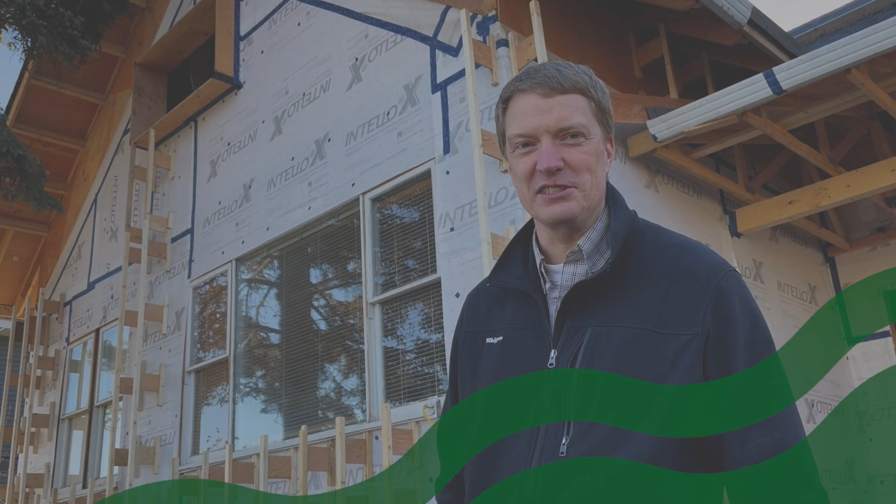My name is Jenna. I'm an initiatives coordinator with the Community Energy Association, and I'll be here guiding you through our first webinar of the Improve Your Home Energy Efficiency Retrofit Journey. So we'll just get started right away. I know everyone's taking some time out of their evening and we have an hour and a half here. So next slide there, please, Murray.

Perfect. All right. So again, my name is Jenna. I'm calling in from what is now known as Nelson, but for thousands of years has been the traditional homeland of the Sinixt Nation, the Syilx Nation, and the Ktunaxa Nation, and is home to the Métis and many diverse Indigenous peoples. As part of CEA's commitment to truth and reconciliation, we recognize the importance of amplifying Indigenous climate leadership.

So I wanted to start off today's session by sharing a bit about Akisqnuk's retrofit journey. Akisqnuk is a Ktunaxa community near Invermere in BC, and their retrofit journey began in 2008 with the introduction of a Ktunaxa Nation energy manager that focused on laying the groundwork for future energy planning and sustainability initiatives, and established a comprehensive understanding of community needs and opportunities in energy efficiency.

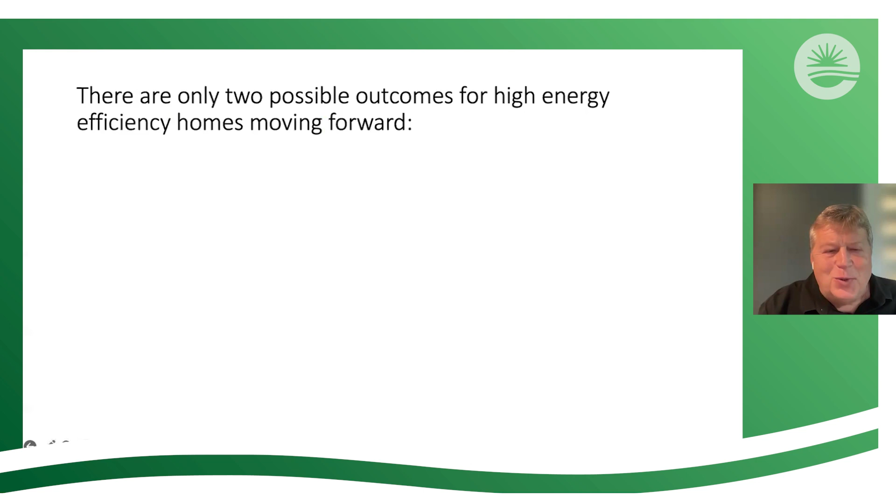What is a motherhood statement? There's only two outcomes: a durable, comfortable, affordable house, or something less than that. It took me a long time to realize that anything short of a durable, comfortable, and affordable home is not the most desirable outcome.

You'll also notice there aren't big scientific names in there. A durable, comfortable, affordable house is anybody's goal. I'm passionate about this industry, but not everybody's passionate about construction. They're passionate about living in a durable, comfortable, and affordable home, and that's where life happens.

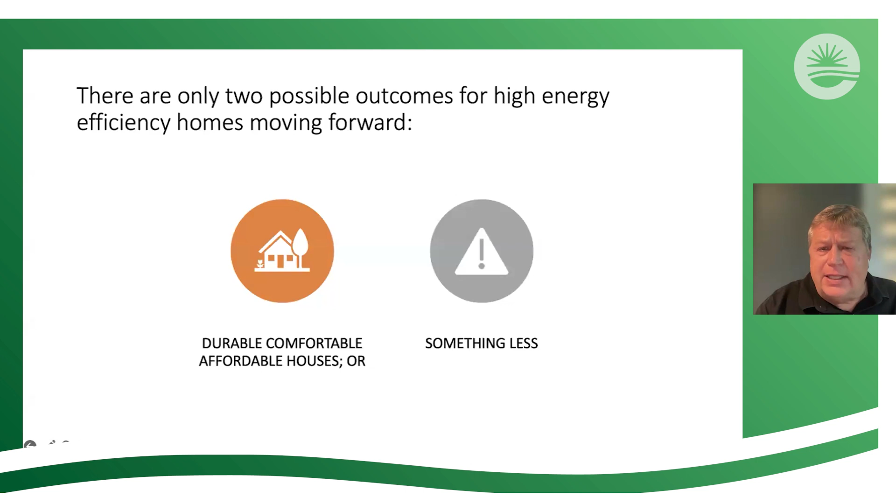So I always want to make sure we come back to that. I'll get into some stuff that seems maybe a bit divergent from that, but I'll bring it back, I promise. So what do we need to do?

The first thing we have to do is gain a deep understanding of the building science of the home, meaning how it was designed, how it was built, how it's performed. That's important because the same home in five locations will perform in five different ways. The unique combination of design, construction, location, and even orientation to the sun, mountains, and other buildings will significantly impact its performance, comfort, and cost in maintaining thermal comfort.

In the beginning, we just put a giant heat source into a house and didn't pay much attention to insulating it. If you wanted comfort, you just put more fuel at it. Because you were putting so much fuel at it, so much energy was leaking out through the barriers trying to hold that living space, and that heat transfer was taking away much of the risk, which almost always comes back to water.

Water is condensation, water is vapor, water is liquid, water is solid - snow and ice. Because we had this virtual hairdryer blowing through our walls, roofs, and even basement walls, moisture didn't really have a good chance to get hold of buildings in the past. I've been asked many times how 200-year-old buildings are still there while 20-year-old buildings are virtually disintegrating. Part of the reason is that in the quest for energy efficiency, we've learned the margin for error is very, very small.

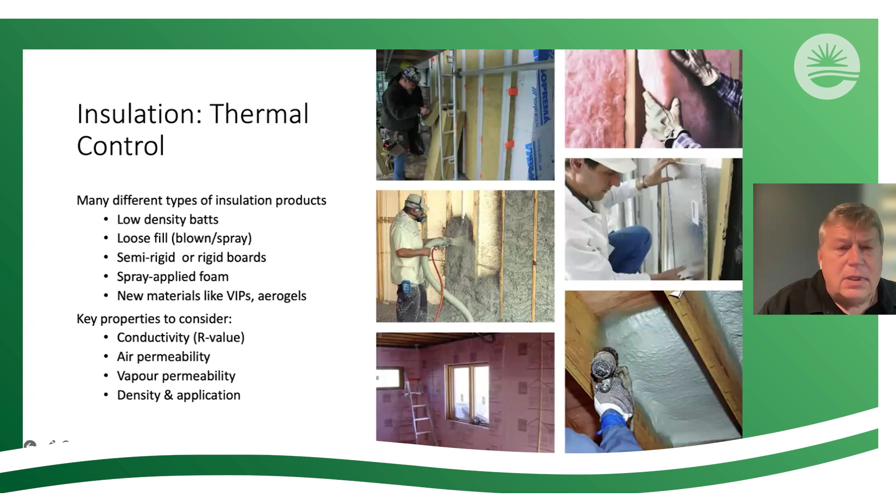So what's the building science elephant in the room? Water.

It's a common thing we can't live without. As humans, we like to live in an environment that has between 30 and 60% relative humidity. That's just human comfort. So too dry is bad, too wet is bad.

A super wet, saturated organic material tends to grab moisture out of the air and absorb it into itself, and it bloats and becomes very digestible by molds and mildews, etc. So water in its liquid state, vapor state, and solid state are all going to have an effect ultimately on the performance of the buildings we create.

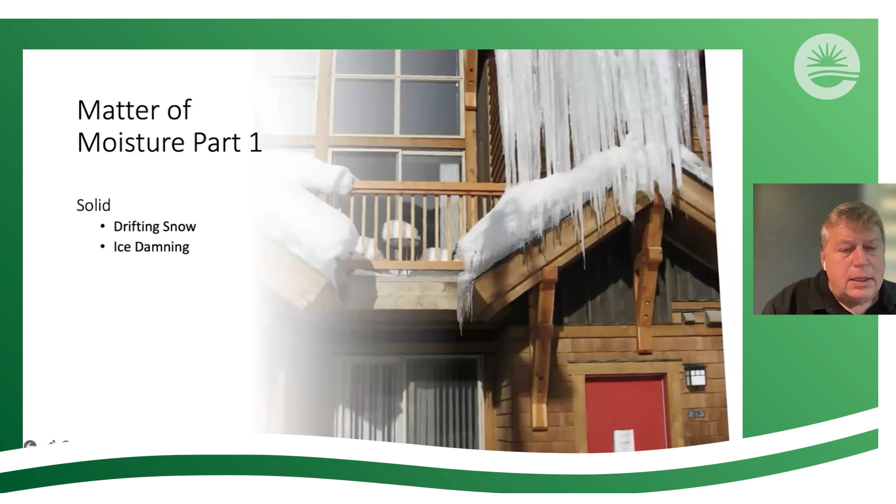The second state of water is in its liquid form.

It can affect us through hydrostatic pressure - that's a big long word for water below the surface of the earth that can affect your basements or crawl spaces where you dig your foundations in. Hydrostatic means it's water, and pressure means it's under force. So water under force below the soil or grade level of your home, acting on the outside of your foundations, can drive moisture into your basements and crawl spaces.

Runoff could be surface runoff around a building, or runoff from your house through redirection of water from roofs into valleys, etc. Rainwater penetration is a really complex conversation - rainwater can get through your defense systems of your building enclosure through many different forces acting on it.

One is capillarity, or wicking of water. Any wicking materials like your concrete foundations will take water out of the dirt and absorb it, and it will climb through that material and appear on the inside surface of your concrete, where it will wet up anything it touches. It can actually then re-evaporate in enclosed spaces and create a nice environment for molds and mildews.

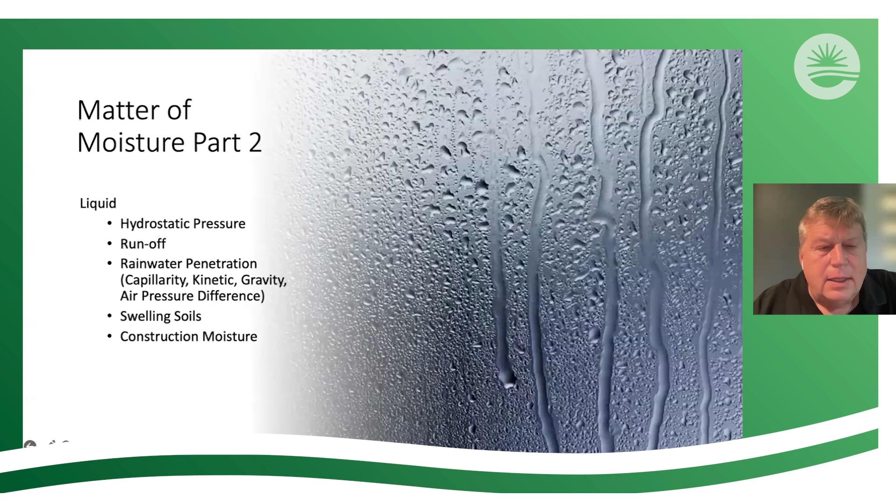Murray and I were just talking about the joys of PowerPoint before it joined just us. A joy. If I gotta manually push them that way, I'm gonna do it.

So rain penetrates if you have a combination of three things. In order to have a leak, you need to have water, you have to have an opening, and you have to have a force or combination of forces acting on the water at the hole.

It's impossible to build a home that's never going to get wet, so trying to get rid of all the water all the time is not really a substantial solution. Even if you were able to build the perfect building envelope with no holes in it, who's to say it would be maintained that way? Who goes out on a regular basis and looks for holes in their building envelope? The one thing that we can control, however, is the force or combination of forces.

And that's where the capillary break came from. That whole rain screen wall that you hear about, the strapping that now goes on the wall and the cladding being pulled off of there, it just separated the hole in the water from the air pressure differential, which was a gap further in. So now it wasn't acting at that hole. We took away that force, and it was enough to relieve us from the leaky condo problem when we went to that level of insulation, about an R20 batt on our 15.6 effective.

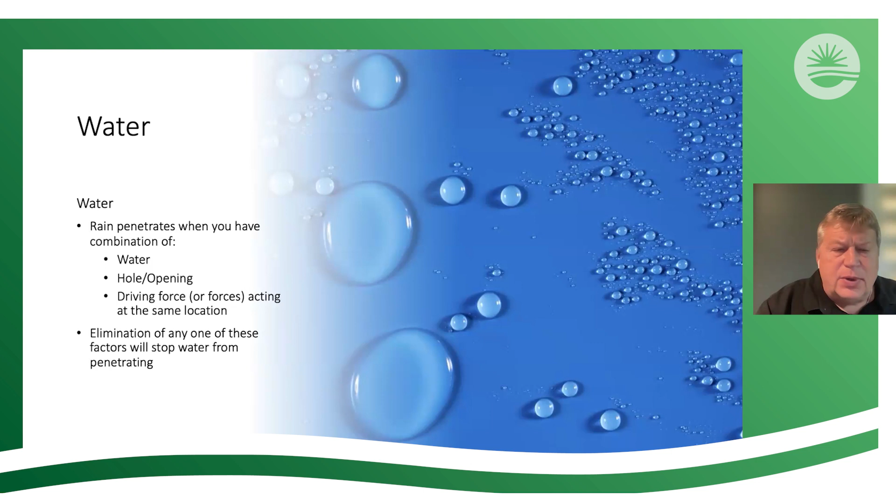Elimination of any one of these factors will stop the water, but it's important to realize that it's eliminating that one force here. Let's do it the old-fashioned way, guys. I don't have patience for technology issues.

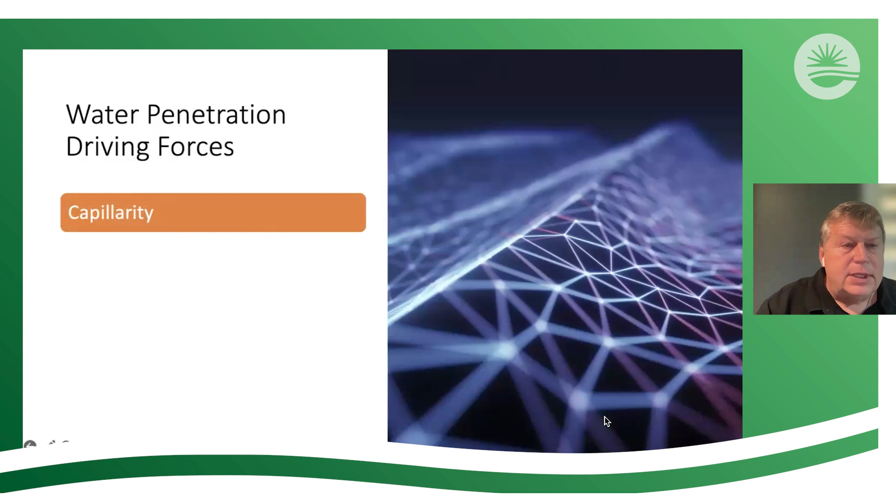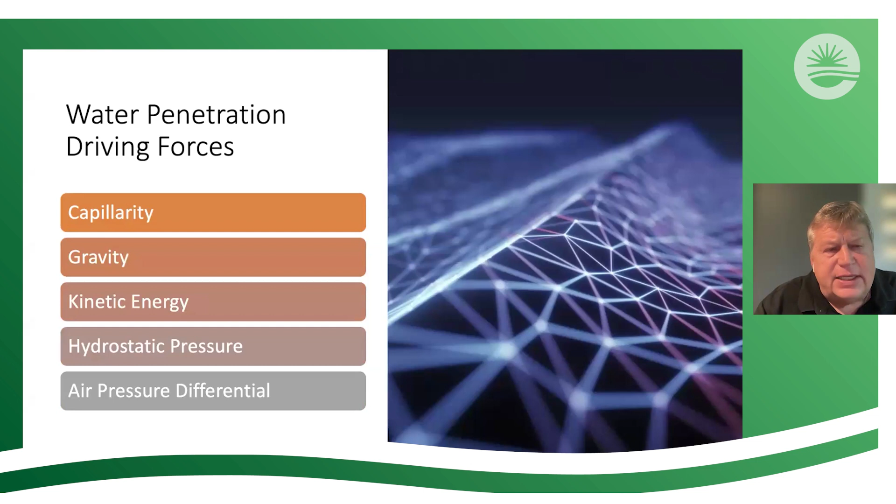Water penetration, driving forces: capillarity, gravity, kinetic energy, hydrostatic pressure, air pressure differentials. Again, we're getting into a too sciencey kind of conversation by the time we get into that part. It's just important to realize that it is sciencey, and we do have the ability to deal with those questions, but that's why it's very important to use the right amount of professional assistance when you're designing and strategizing what it is you want to do.

Then you've got your vapor contributions of water. You can drive vapor across a building envelope in two ways. You can either have a hole and create an air pressure differential, and then a whole bunch of moisture molecules will just flow through that hole. Or you can have diffusion - a much slower, much less significant volume of moisture that will roll through, but it will breathe through like a Gore-Tex jacket. Most construction materials tend to be quite vapor permeable. So what we want to do is have a vapor barrier, and we want to make sure that it's always warm. Otherwise, it becomes a condensing surface. So having vapor diffusion control is important.

Having it in the right place is imperative, and controlling for air leakage is extremely important if we're going to get control of the potential for unintended consequences of building science through vapor, through rainwater penetration in its liquid form, and even snow driving up into attic spaces, etc. There's a bunch of other things that can happen with vapor beyond this conversation as well.

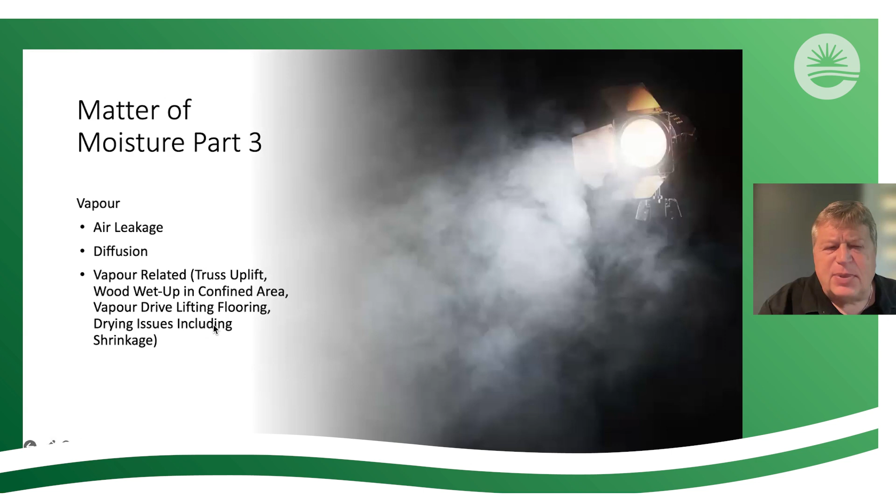But you may have heard of truss uplift, and vapor drive lifting flooring is something I can never leave out of a presentation, and I promise you a picture of that in a couple of slides here.

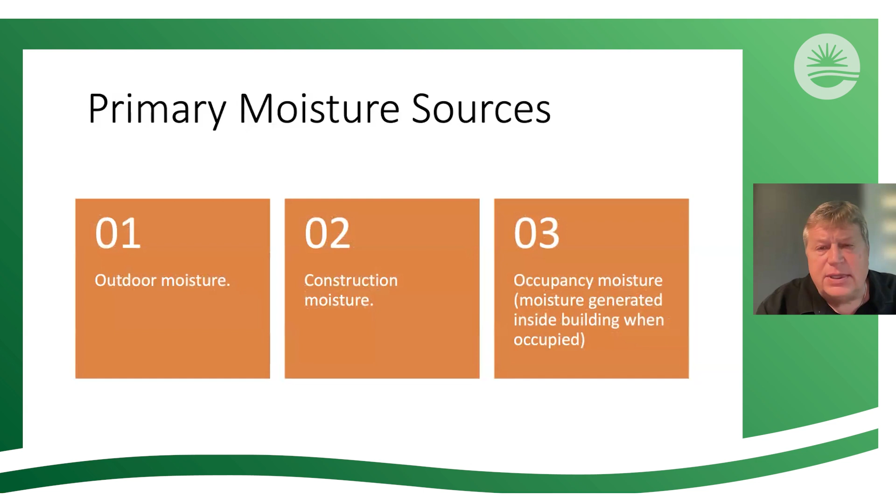Primary moisture sources: outdoor moisture, construction moisture, and occupant loads. People ask me how much moisture is actually from people, and it's more than you might think. What affects outdoor moisture?

Wind can drive it, affecting how much rain gets thrown against the building during wet weather. The highest positive pressures are at the top and edges of a windward face. It's also the negative drop in pressure on the leeward side as wind vortexes over the top of a house or around its side, and that can draw warm moisture-laden air outward through your building envelope, which can be problematic too. So you can get rainwater penetration on one side and vapor condensation problems on the other side of a house. And all of this happens if you don't get vapor diffusion control

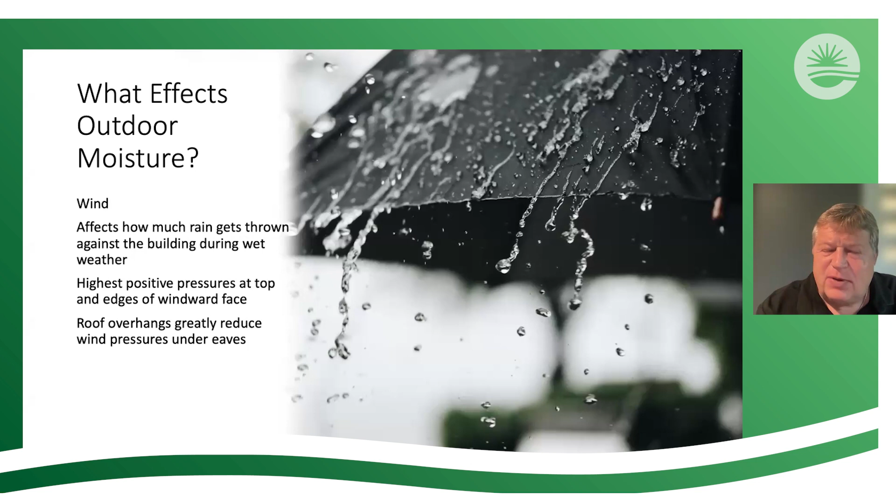exactly where it needs to be and how it needs to be, and most importantly, if you don't achieve air tightness.

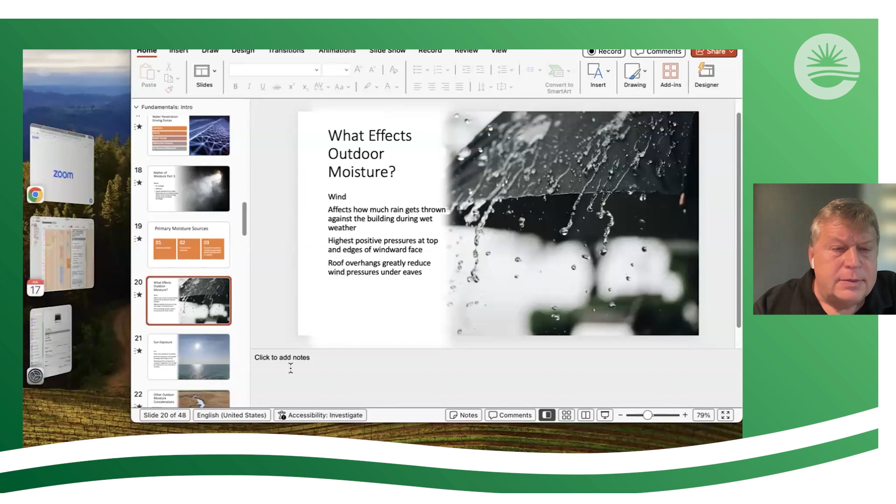Murray, if it's easier, I could share the slides. You can just let me know when to. Yeah, if you've got them there and you want to go through the PDF deck that I had. Yeah, bring them up, then we can switch it over.

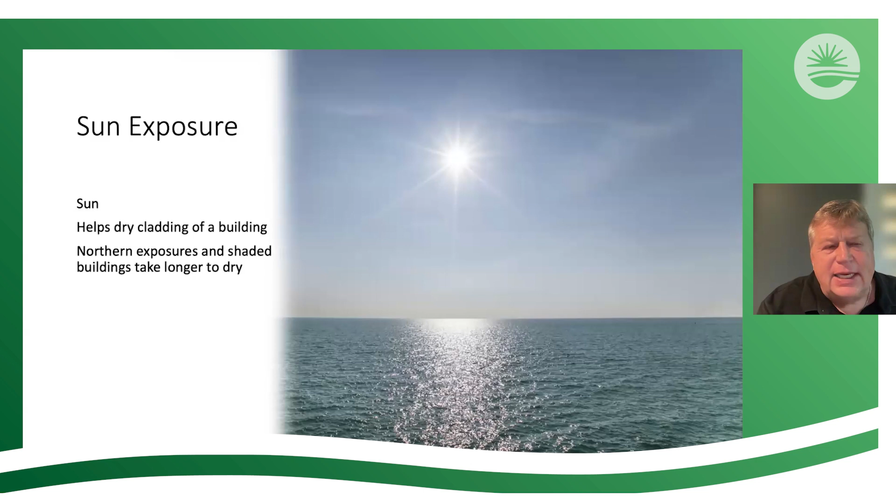I'll just mention that sun actually plays quite a role. It helps in the drying of a building. It definitely affects thermal performance. It's also free heat in the winter if you collect it properly, but it doesn't really help you on your northern exposure. So orientation of a house and where you've got most of your glass and other factors has to

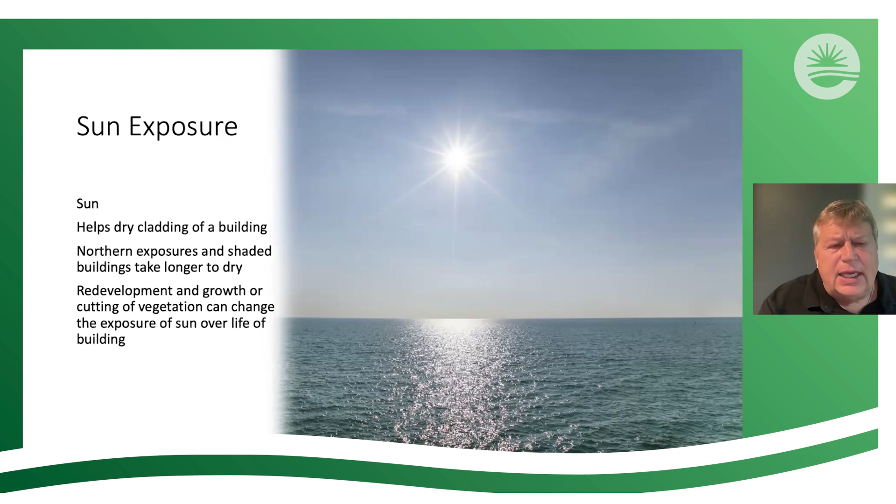be considered. Just let me know when you want to switch it over here too. There we go.

You might also want to consider that if you're designing because you've got shade from a forest beside you, and then they knock the forest down and put similar size houses in beside you in 5 years, the whole environmental load on your building is going to change: wind, sun exposure, etc. So understanding what potential changes you may see, and if you can't control them or you're not sure, hedging your bets is a good idea in design.

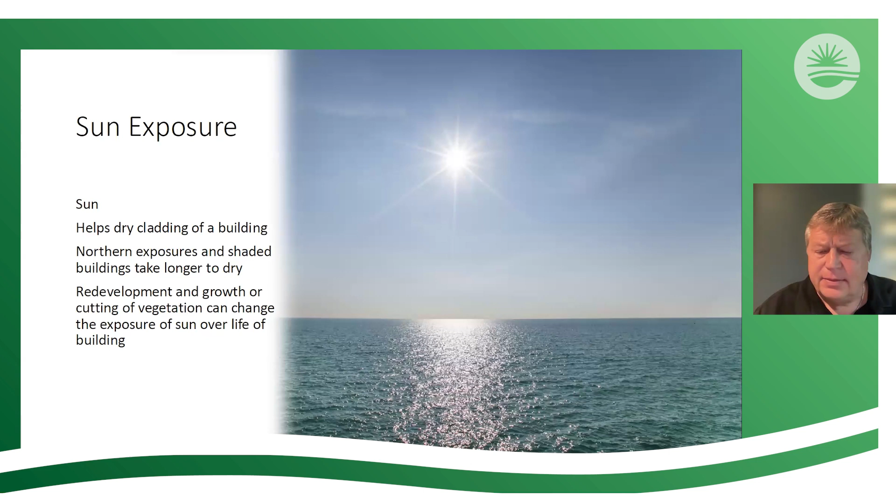Flip that. Outdoor moisture considerations: groundwater, surface runoff, and poor drainage can lead to water entry and high indoor humidity.

Is that a sign of performance and comfort in a home? Or is that a sign that part of your home is really not a very livable condition and we're just tolerating it? We don't need to have that, but we need to understand how we can build a home so that we don't have to suffer those challenges.

A well-drained site will divert runoff and be your friend. Clay soils can have swelling tendencies, as I mentioned before, and that can heave your building around with great consequence. Talk to people north of Vernon and Armstrong—there are dancing buildings up there that are just exciting. Year over year, they can go up and down 2.5 inches from one end to the other. And we solved it by saturating the ground 12 months out of the year. It just kept it wet and it stabilized.

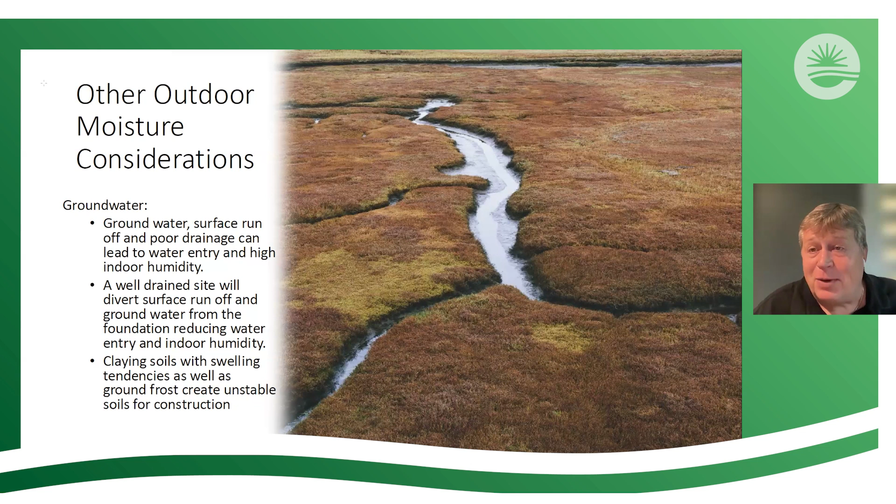Other moisture can come from any direction. So if you want to flip, that's a vinyl—no, actually that's an engineered floor in planks. And you can see how it's all burped up at the wall there.

That is on a basement floor on concrete, and that is a moist concrete slab, and that moisture is driving through, turning to a vapor, and the vapor pressure actually lifts that floor. The owner of that floor, every time they go away for a weekend, had to come down and stomp their floor down—

burp their floor, they called it. So you see it in obvious forms, and then sometimes you see it in the darndest ways in failure out there. But certainly not acceptable.

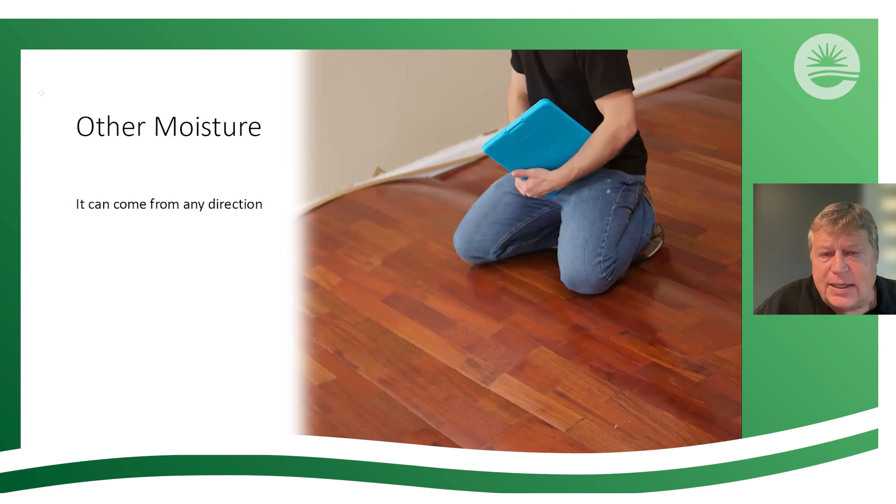So the air barrier—5 requirements of an effective air barrier system. I wanted to focus on this. The next session is going to be on air tightness and achieving it. It's extremely important for so many reasons.

The 5 requirements of having an effective air barrier system: any material you use has to be air impermeable, it has to be continuous, it has to be structurally adequate, it has to be sufficiently rigid or supported to perform as a rigid membrane, and it must be durable—it has to last the life of a building.

And you can't maintain an air barrier typically because it's usually elements within the structure of your walls, basements and roofs. It's not that you buy a bottle of air barrier or a roll of air barrier—you buy a series of materials, devices and equipment that in combination, one to the next, are joined in an air impermeable, continuous, structurally adequate, sufficiently rigid and durable method, so that the entire combination works together as one plane of air tightness in the home.

If you give a balloon to a child and it's got a small hole in it, are they going to be excited? It's sort of a binary thing—you either have a balloon or you got rubber with a hole in it. With an air barrier, it's not quite as tense as that.

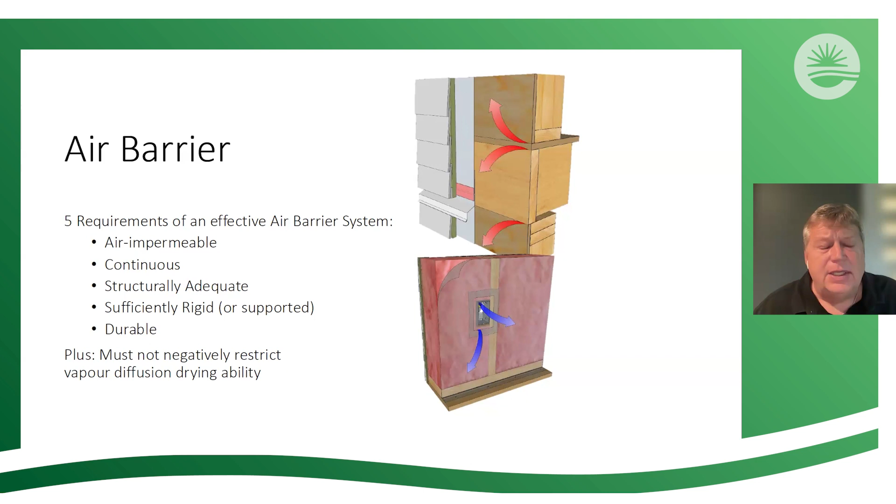There's lots of different materials being used here—insulating materials, sheathing membranes, a lot of components. The newer specifications under the fenestration standards and codes are demanding increasingly higher performance for air tightness, along with thermal characteristics. Different accessories and materials are all being tested and vastly improved. We're even seeing changes in the way houses are being constructed—we're not adding all the beautiful architectural overhangs, portico roofing and nice details that make a house beautiful; we're keeping them in their simplest geometric shape, as you see at the bottom there.

And then it's really easy for us to get one continuous airtight wrap around that entire house. Those are some of the new hybrid materials - a peel and stick vapor permeable membrane that can be applied from top to bottom. The lapping is beautiful and the codes embrace it. It's a very effective way of getting the levels of air tightness we need for advanced energy efficiency, though not the only way. We do a ton with building wraps and synthetic sheathing membranes too, and we've had great success with that, particularly exteriorly insulated.

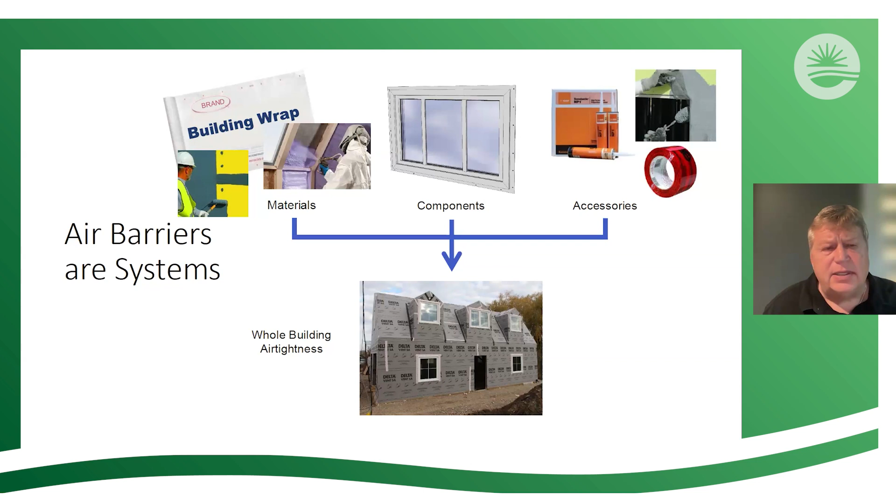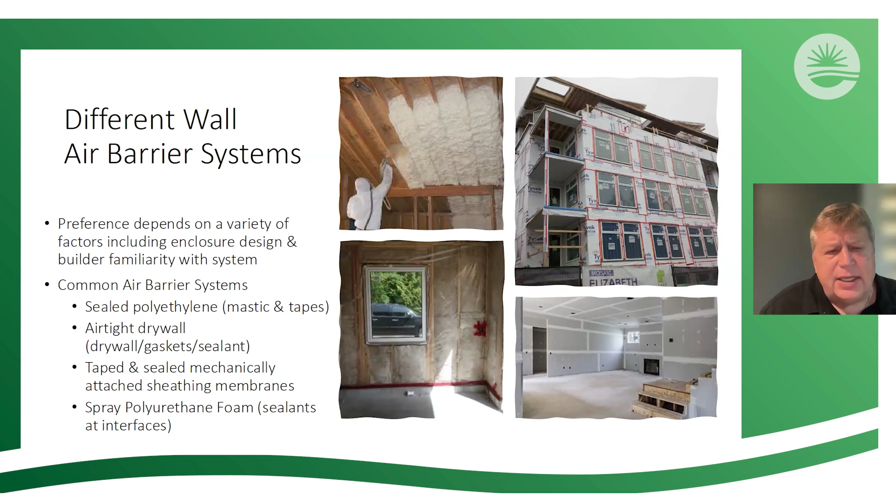So, different wall air barrier systems. You can see spray foam - that's some of the soft foam up there, open cell. You can see the sheathing, synthetic sheathing membranes on the outside. No, they were not the cause of leaky condo - in fact they were quite the opposite. Down below, you see drywall with all the joinery made complete and airtight. Although it looks like a regular drywall job, this is being installed as continuous airtight drywall, which is a technique losing favor. The old school way was poly with a bunch of tape or butyl sealant, trying to get your air tightness along with your vapor barrier with one material against the batt insulation. This is a pretty old school technique that's losing favor for a bunch of different reasons.

So rain penetration driving forces: capillarity, gravity, kinetic energy, hydrostatic pressure, and air pressure differentials. We've talked briefly about all of those. I want to move on and talk about how you design away from that. Well, first thing you want to do is deflect it - overhangs at the edge of your roof, good roofing profiles so the water is channeled to valleys, the valleys channeled to appropriate drains, and the drains channeled to appropriate discharge.

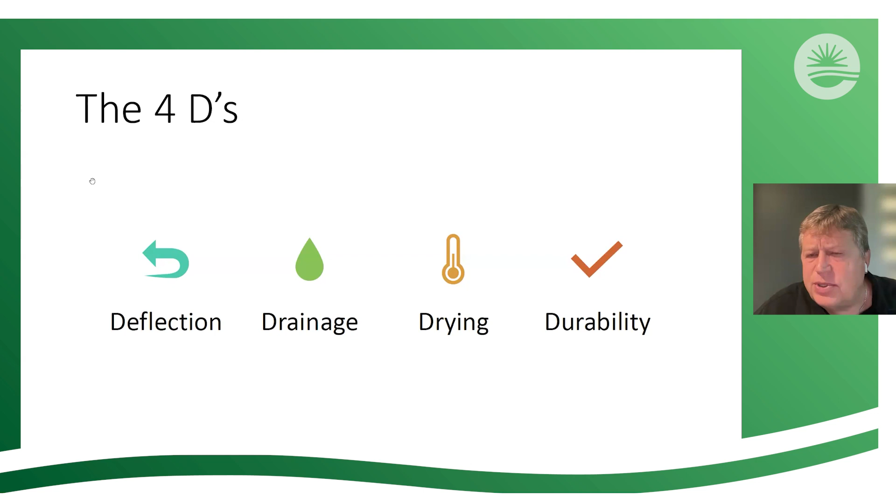Adding drying potential into your construction, so when it's not wet out the house can dry and dry readily. Everything you choose, you need to understand how breathable it needs to be. And then durability - where you know something's going into service in a tough environment, make sure we're choosing materials that have durability for those tough environments. So: deflection, drainage, drying, and durable materials.

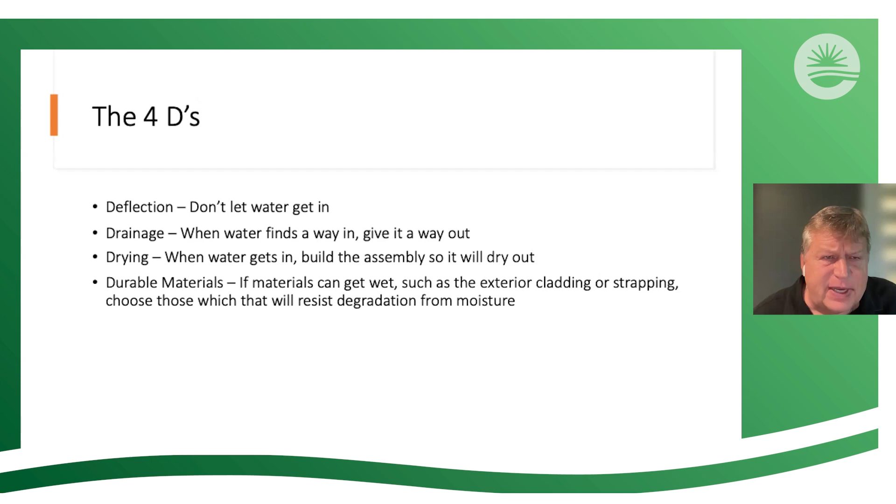Construction moisture - there was a lot of concern about pre-existing construction moisture. It's still a concern, and obviously on the wet coast, maybe not as much in the east and central Kootenays, but it's not uncommon to see 6 months of rainfall on a home before it ever gets dried in. That can put an awful lot of pressure on things. Materials are supposed to be at 19% moisture content or less before you close them in, in terms of your main structure. A lot of times when we go in and check the plates and things that have been soaking for 6 months, they're in the 24, 25, 28% range.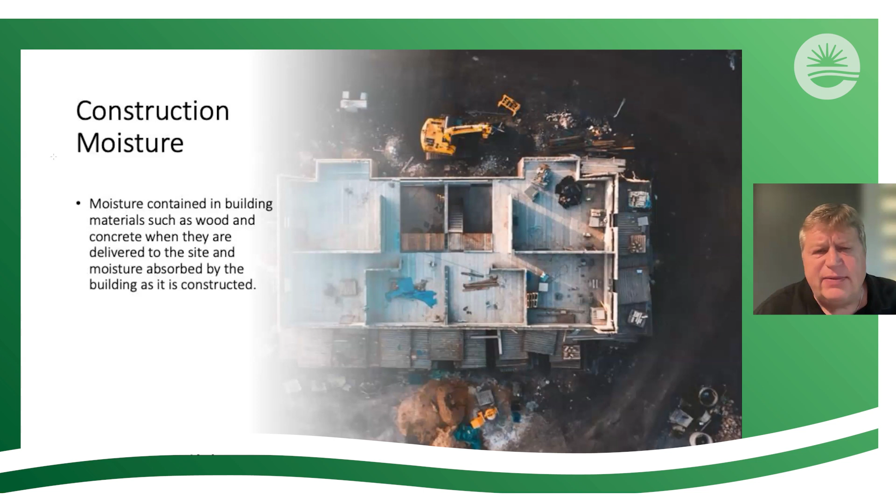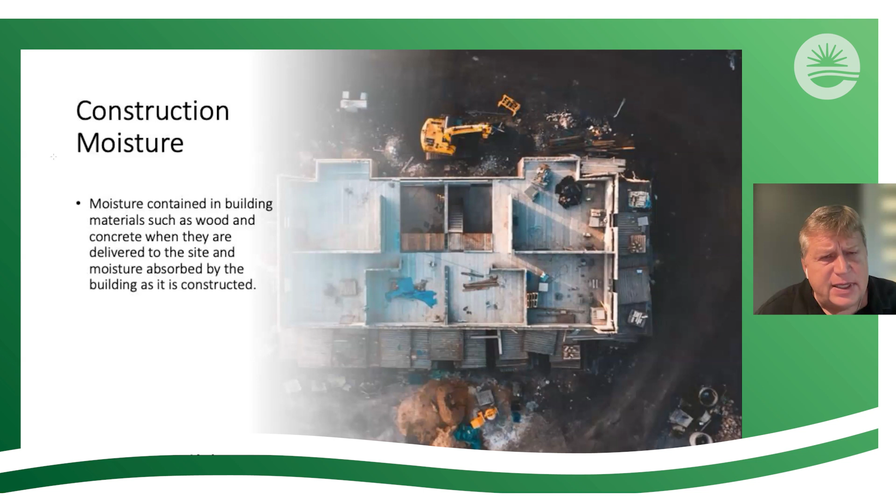So improving the speed in construction brings economic value and lowers the environmental loads imparted on a building during construction. Reduce construction moisture by ensuring you're under 19%, keeping materials protected when storing them, and testing your lumber before you close it in. These are all tools that are readily available and well understood, but they have to be practiced - constantly sticking with moisture meters and understanding what the readings mean.

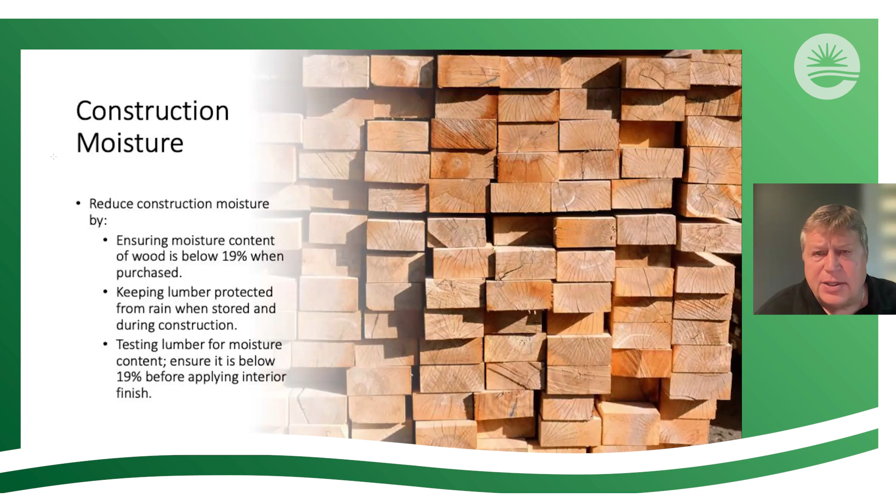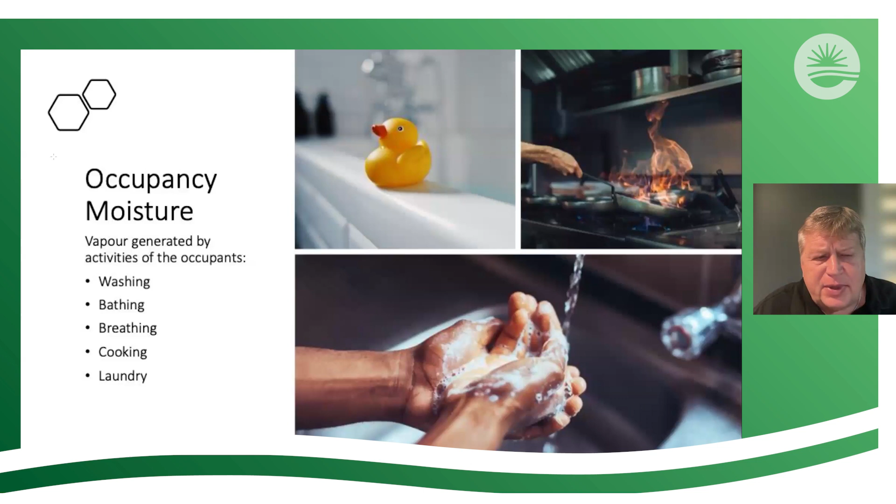I want to talk about occupancy moisture and humidity - how much should people add to the environment? Human activity comes from washing, bathing, breathing, cooking, and laundry. In new construction, moisture in concrete and lumber can add as much as 4 to 5 liters a day during the first heating season, so there's a substantial drying period in that first year. An additional 2 to 3 liters a day come from a combination of clothes and floor washing, use of gas appliances, cooking meals, dishwashing, house plants, showers and baths - that's 5 to 7 pounds of water. 4 occupants generate about 5 liters of moisture per day.

5 liters of moisture a day in the form of vapor. So if you didn't change that air inside your house, and it couldn't breathe out through the building envelope, and we put a vapor barrier in there so it can't, and it can't exchange because you've got a really good air barrier, then what would happen to your home if you just let people live in them? The truth is you would blow past that 60% relative humidity quite quickly.

So the idea of building a building envelope super tight is not because you want to entrap everything in there. You still need to vent it. And we've built buildings tight enough since the 80s that we can't just rely on accidental ventilation through the holes in the building envelope.

So what we need is mechanical devices that allow us to exchange the air with that good, lower absolute moisture content air from outside and bring it in. Heat recovery devices and energy recovery devices pass it through a heat exchanger, so you get the fresh air coming in, but without mixing—it goes past in the heat exchanger through a bunch of chambers where the exhaust air passes. So all of the heat in the winter that goes out preheats the air coming in.

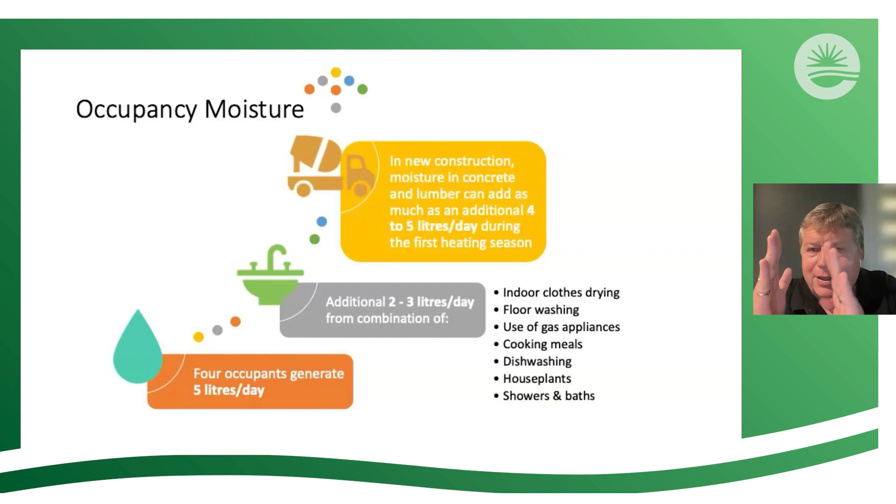So in the winter, somewhere through that insulation it goes from, on a cold day, -20 to +20. Somewhere in there is a magic point where this no longer just diffuses as a vapor, but actually condenses on surfaces - so that's wetting inside the wall.

So to answer the specific question: you have to build it airtight if you want energy efficiency, and you have to build it vapor tight, but you have to get the vapor tight component of that assembly on the warm side. What we're finding is great success if you build your structure out of 2x4s.

You don't need 2x6s for structure unless you're building a crazy 3-story plus home, and then the building code will push you to 2x6s on the bottom floor. But we're building most of our high energy efficiency homes back down at 2x4s, leaving them empty, putting the sheathing on the outside of the house. Then we're putting the vapor barrier on next as a waterproof membrane, and now it's perfectly airtight, perfectly vapor tight, one material. Then we put all the insulation on the outside of that.

There's a great building scientist out there who asked me 38 years ago at a presentation I did at BCBEC, when he was still a student, and is now the great Joe Lstiburek, the PhD guy from Building Science Corp out of Boston, and expat from University of Waterloo in Ontario. He's a great presenter and a tremendous guy to listen to. But he asked me when I presented the perfect wall concept.

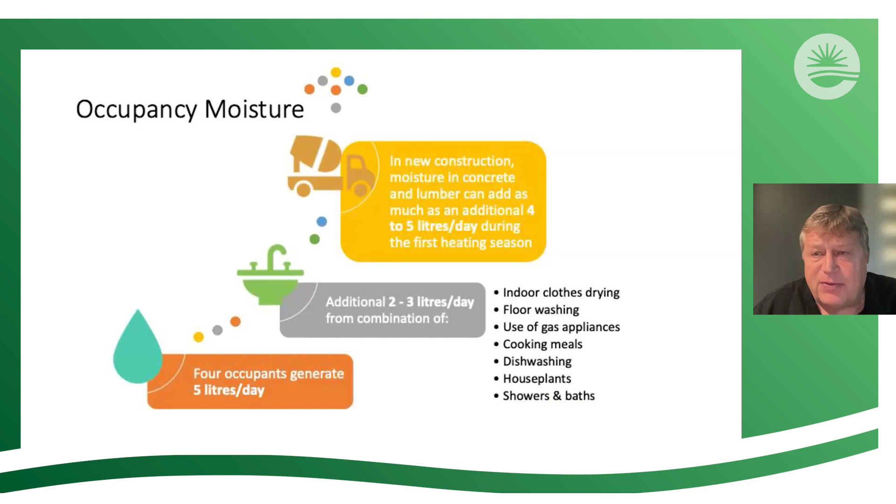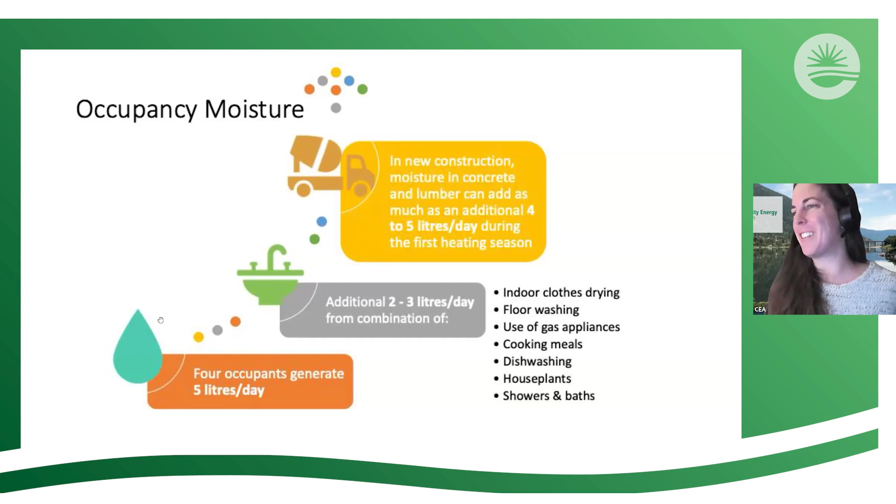Well, we'll move forward to some health and safety concerns, and I might bring up spray foam again in our Q&A there. No, absolutely. Okay, alright, so I'll carry you along. Thanks everyone for the questions, that was great. I'll just forward us along to the next slide there.

So human comfort is defined at 30 to 60% relative humidity. I touched on that quickly, but I think it's really important. To be honest with you, it's 27 to 55% by ASHRAE, the American Society of Heating, Refrigerating and Air-Conditioning Engineers. But what we found is, particularly in the wet lower mainland, that it's warm enough and wet enough for a long enough period of time in the shoulder seasons, fall and spring, that if we run continuous ventilation, the air outside is ultimately too wet—if we bring it in, it won't stay below 55% relative humidity, it'll actually saturate you above 55%.

So the answer to that, two code cycles ago, was the government decided to just round it off. If you round off 27, it becomes 30, and 55 you can either take it up or down, so they took it up. What it means is you don't need to bring in a mechanical engineer for every home you build in the temperate rainforest of the wet coast. In the Kootenays, you're not worried about that—the air 12 months of the year has value for lowering the humidity inside. So we vent for control of humidity in the houses, and it's based on the expected occupancy of the home, expecting it will be used in a way consistent with how the average Canadian uses their home.

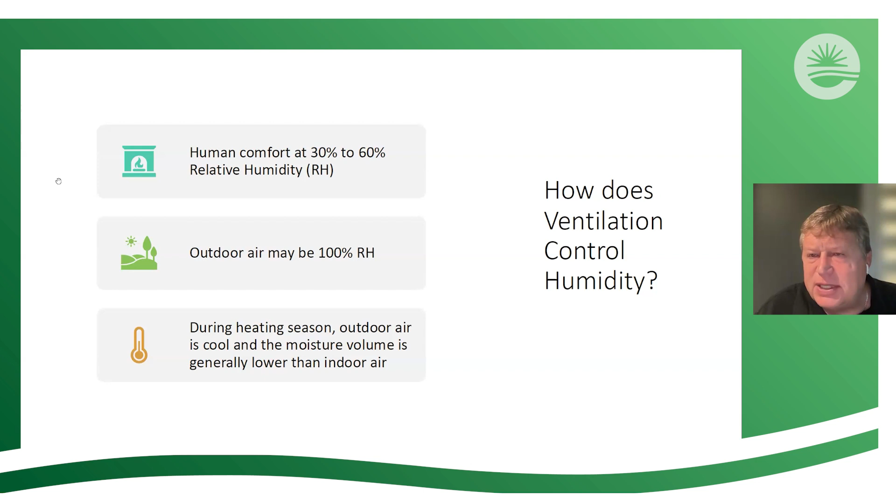So for a modern home to perform, we need a moisture barrier, which is your cladding or your roofing or however you're protecting the outside of your foundation wall. You need a vapor barrier. You can't not have it. And without it, you would have a tremendous amount of challenge.

Interestingly, regarding ICF, that polystyrene foam at 2 to 2.5 inches is a vapor barrier. Anything more than 2 inches of concrete fill, and those ICF are typically 4, 6, and 8 inch fill, is a vapor barrier, and so is the foam on the outside. So where's the vapor barrier? Well, the whole wall is vapor tight. So you really don't care which way the vapor is pushing. It's never going to go through the wall, and it's never going to cause condensation because there's no pockets in there for condensation to form, no condensing surfaces.

Whereas when you have lightweight frame construction, it always finds pockets and condensing surfaces. You need a capillary break in high moisture index zones, and there's an awful lot of discussion that's quite advanced, and it would not surprise me at all. I'm almost to the point of saying it's highly, highly likely that by 2030, any house built in Canada will be required to have a capillary break behind the cladding.

So no more exemption for the lower moisture index regions across Canada. And that isn't because it's suddenly getting wetter in other locations, although you'd be surprised if you look at the wetting maps in Canada. It's like a big U that comes from the west coast and goes up under Calgary and goes out and swallows up Saskatoon, misses Regina, and is now almost over to Winnipeg, and then it comes back and, of course, widens out and gathers up the whole east coast. All the way in there by the new wetting data is in a high moisture index region.

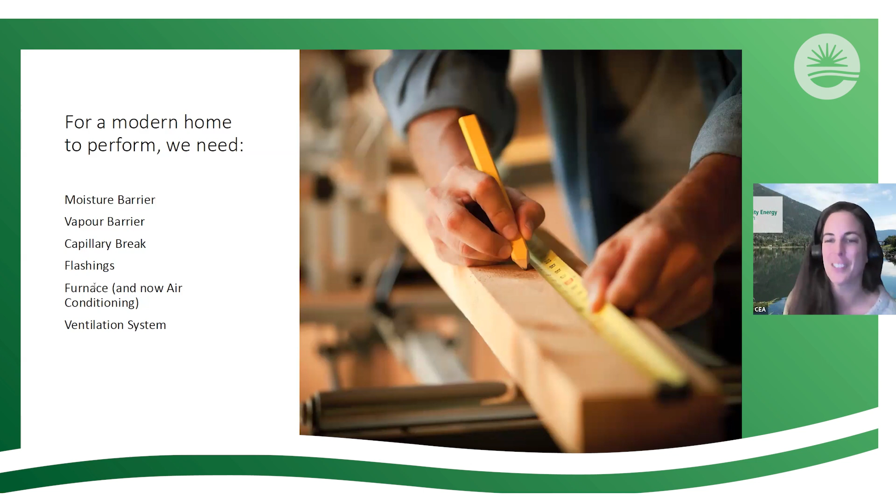Murray, I just want to give you a time check there. We have just over 10 minutes left in the session, and I know we want to. Yeah, and I think we can blast these ones real fast. Let's hit it.

So energy efficiency, what does it take to improve energy performance? Reduce the energy leaking out or sneaking in. That's all you got to do. The building envelope, or building enclosure, is in its simplest form a sphere that keeps the outside out and the inside in. You wouldn't need any energy if zero was flowing in or out, because you'd set a temperature in there and it would just stay that way forever.

Energy is interesting. First law of thermodynamics: you can't create or destroy energy, you can only change its state or location. So if you had thermal comfort and no way for it to escape or come in from outside, you'd have a perfect building envelope that would need nothing. But you'd have an opposite problem, because if you occupied it, your basal temperature of occupancy, your human-generated heat, would cook you out.

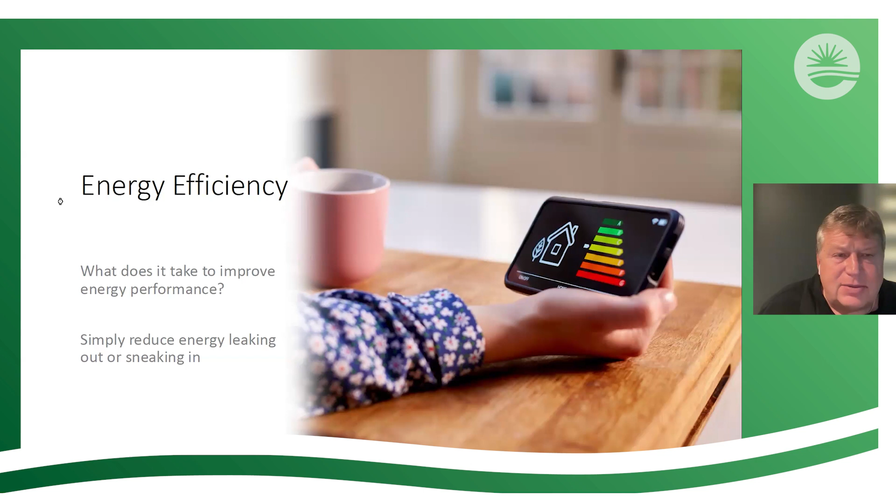But that's all energy efficiency is. Energy moves in 3 ways. Tough to figure it out.

The first way it can move is conductively. The best way to understand this is to imagine if you were holding onto that copper pipe while soldering this joint without a glove on. What would happen in a very short period of time? You're not hitting it with a heat source, but it's going to get to you by conducting through a conductive material. That is one way heat energy moves.

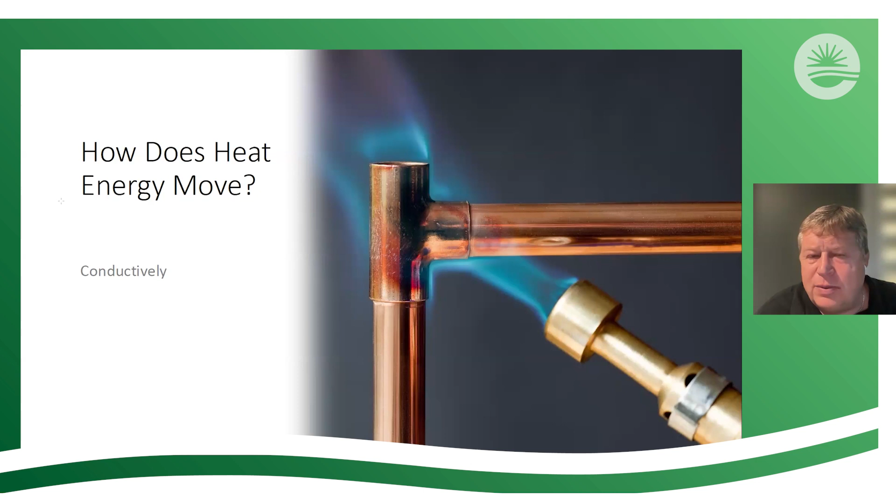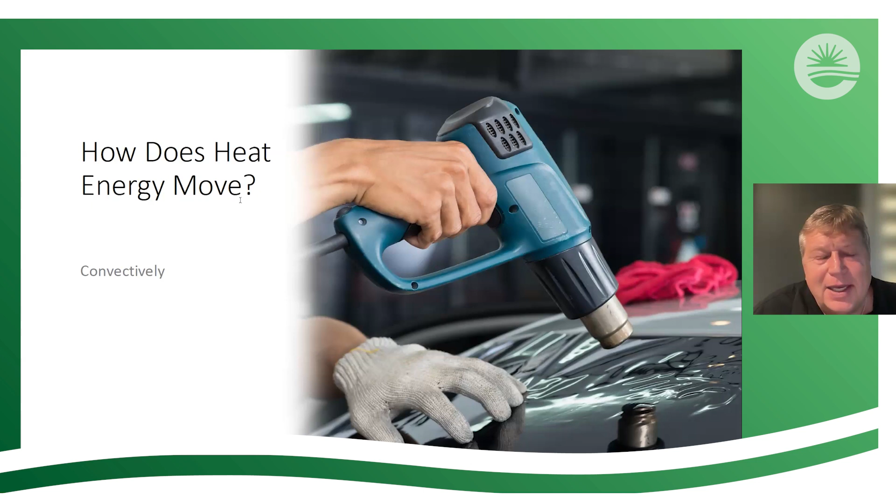There's a second way it moves. Here's a heat gun—it's got a coil, and through resistance it heats up. Then it's got a fan, and it takes air and blows it across the coil, which transfers the heat into that air. Then that fan convects that hot air to where we want to do work—in this case, putting a wrap on a vehicle. That's convection. So what is a forced air furnace—is it a conductor or a convector? It's a convector. There's a third way heat energy works, and it's a bugger to explain.

It's radiant energy movement. What I'm going to do is prove to you that it's there. There is Sol, our sun, and there's a PV panel. We know that whenever it's shining, we can take that energy and convert it into electrical energy. We also know it gets really hot when that sun is beating down on us. But what's between us and the sun there? Is there any conductive material, any brass pipes, or even air particles out there? There's nothing. So what could it conduct through?

It can't. Is there a giant fan behind there and pixies throwing dust in front of the fan that warms up as it blows over the sun and bombards us here at Earth? No. There's a little bit of solar dust out there, and in the 8,000 years it would take to drift from the sun to us, it would have lost any energy charge to other solar dust or dissipated it. So I'm not going to prove or explain radiant energy transfer other than to say, if it can't conduct or convect, what's left?

The science to it is, it's just light energy. It's in the infrared spectrum where we don't see it, and it moves exactly like light, but it actually is heat. That's why infrared cameras can see thermal emissions—they can see body heat coming off. You know, the criminal sitting behind a bush trembling, thinking he's so well hidden from a thermal camera—no, the camera sees him because it's picking up that infrared light, which is that heat energy.

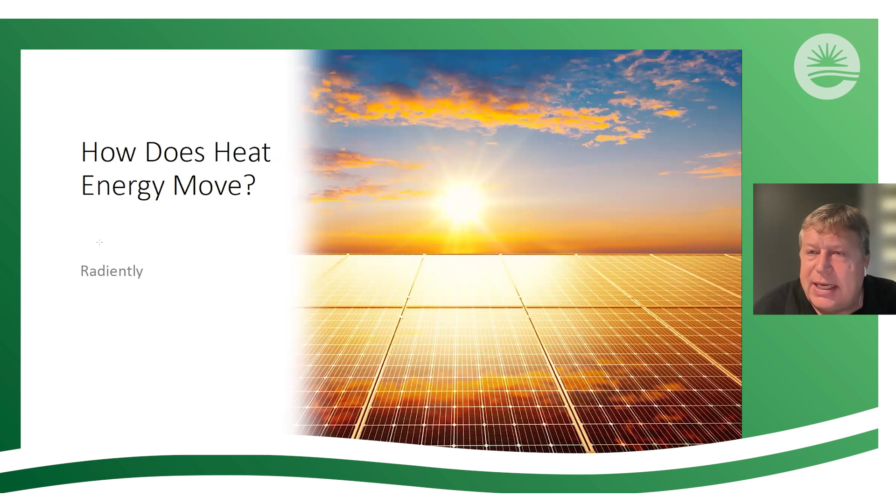So there are three ways that energy moves. If we want to take care of conduction, we've got to improve the insulation and have better quality windows and doors with good U values. U value is the inverse of an R value. The R value of windows and doors isn't very spectacular, and they don't want to advertise this phenomenal R5 window when it's expensive compared to the R20 batt insulation we're putting into our walls. So they use the inverse, talk about conductance, and get a U value—it is a real measure, but it just doesn't confuse people by comparing it to batt insulation.

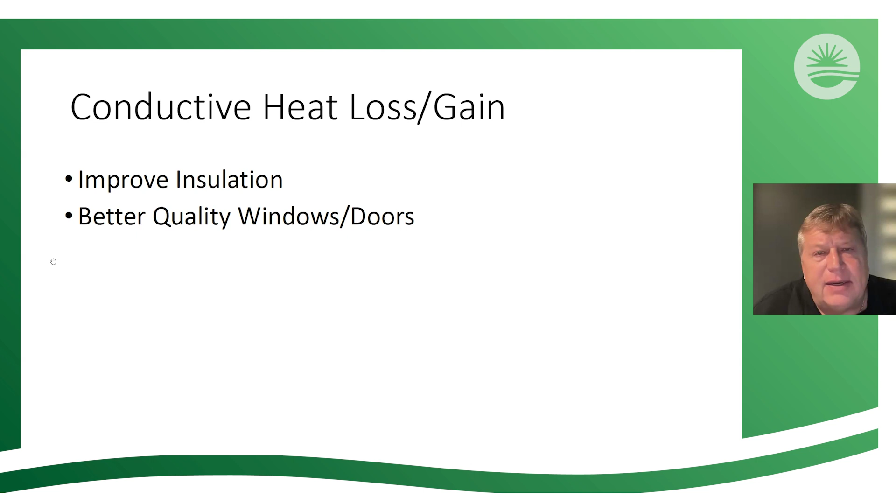You just got to buy better windows with low U values—the lower the better for that conductive energy gain or loss. Next, if you want to get rid of convection, you just need air tightness.

That's it. Everything's got to be airtight as one complete air barrier system around the entire perimeter of your home. That's all you got to achieve. It also takes care of flanking paths for acoustic, and it gives you control of your ventilation system, so you can put heat recovery into it, you can put filtration into it. There are so many things that air tightness brings that it is just a given.

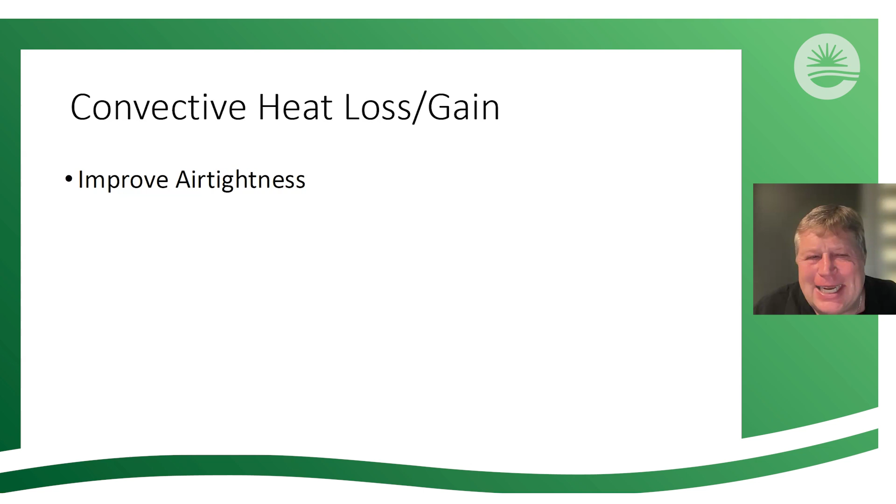And your next session, is James doing that one, Jenna? Yeah, you're going to get yourself a good old dose of him, he's an old student of mine from BCIT, and he's an amazing soul. He's very passionate, and he will definitely show you that air tightness is not an option. And we'll hit the next one here.

For radiant heat loss and gain, realistically, if you had no fenestration or glass surfaces, no transparent surfaces on your building, you really wouldn't care too much about radiant heat loss or gain. A little bit of surface effect, you can take care of that with some tinfoil on the outside and you'd be fine. But we get an awful lot of solar heat gain through our windows when the sun is shining on them, and we also get radiant loss from inside going outward through our windows.

That's where these low-E, or low emissivity, coatings come in. So when you hear low-E glazing, there are different films. Some are designed to keep the heat in from going out at night, and some are tuned to keep the high temperature heat source of the sun from pushing in.

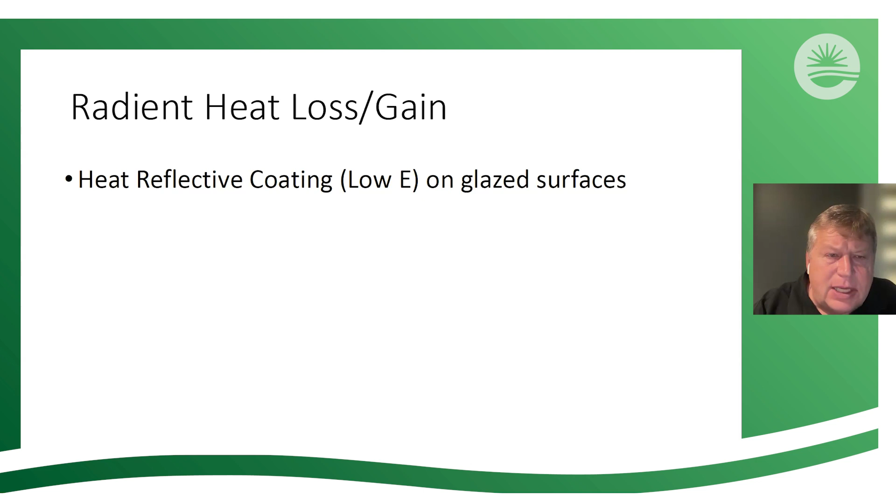So we're at the end of the poll here. Is there any way I can just get one more minute here? Yeah, you go ahead. Sorry, I was just running the poll in case anyone has to jump off right at 7:30. Do you want to just flick to the next one here? Yeah, if you could move that poll over too, because I can't see mitigating. I think that's on, that might be on your screen there, Murray. No, is it okay? Oh, so you sent it to me. Oh, it was amazing.

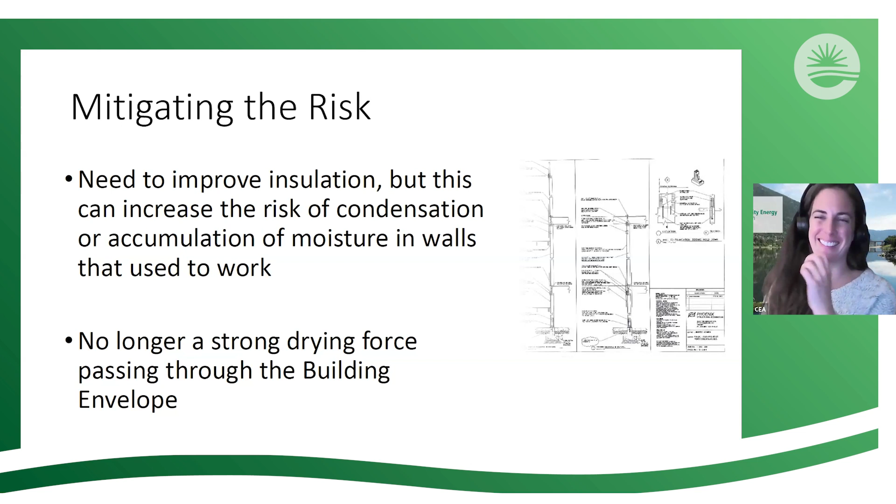Mitigating the risk: need to improve insulation. I did see a comment in there too, an opinion when we were talking about radiant, so I do want to give a minute to read what that was. Need to improve insulation, but this can increase the risk of condensation or accumulation of moisture in the wall, no longer a strong drying force passing through the building envelope. We talked about that, let's flick to the next.

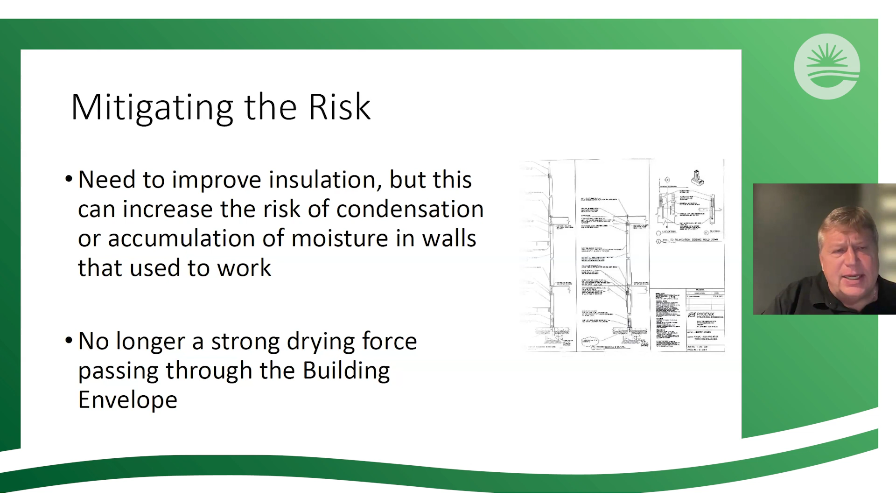It is the low-hanging fruit. You can't create a problem for yourself by going airtight, and you can't go backwards to the time when we didn't need air tightness. Those days have been gone for 40, 50 years almost here in Canada. We've coded ourselves to a higher expectation than that. So understand that there's no longer a strong drying force passing through the building envelope by not allowing warm air through there in great volumes. So we've got to mitigate that risk. We've got to make sure that if you're going airtight, you want to go all the way. Remember the child and his balloon, or her balloon. Next slide.

Mitigating the risk: need to improve heat reflectance in your windows, but that can decrease free heat in the winter. On the right there is a TECA, and that is a F280 report, CSA F280 report.

This is one of the tools, along with the EnerGuide Hot 2000 reports, that you must engage if you're going to retrofit. The EnerGuide gives you a whole metric of how much energy you expect the house, with the changes, to use over a year. This one tells you what the peak demand loads are going to be for the maximum heating days and the maximum cooling days, so you can right-size all your equipment.

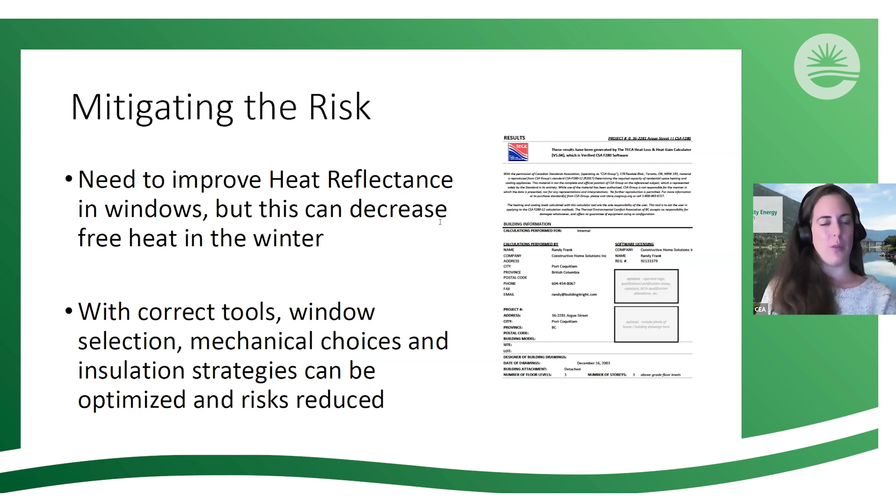All right, well, any other questions, or can we invite Fortis to take the helm here? Oh, Greg. All right, Greg: Will an owner recover the cost of a 3-pane window versus using 2 panes?

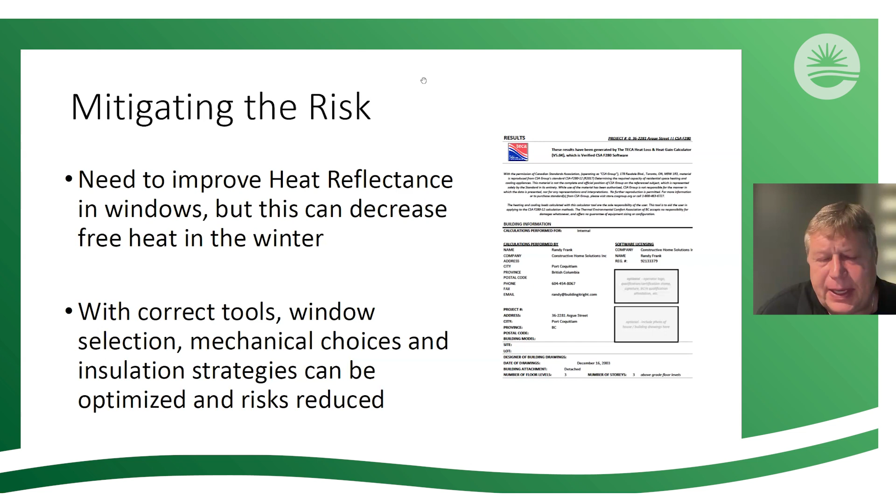I'm going to say that we have been shocked with the windows that we've chosen. You can get there with an S4 coating on a double glazed window assembly, but I think triple pane glass is going to be the future in all of Canada.

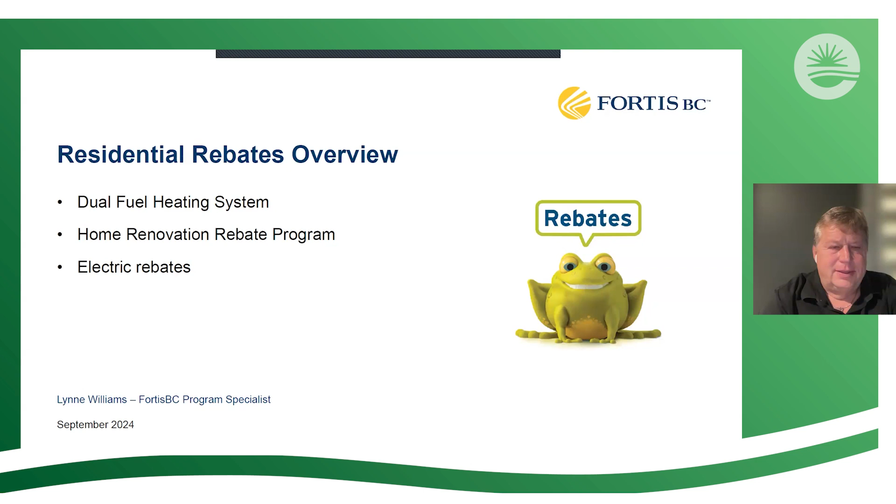Murray, that was an excellent presentation, a lot of good information there, so really appreciate that. My name is Lynne Williams, and I am the program specialist for conservation, education, and outreach at FortisBC. I'm just going to share some information with you on our residential rebate programs, which hopefully help our customers offset the cost of upgrading old equipment to new energy efficiency equipment and making improvements, because these improvements can cost a lot of money. So we definitely want to help people afford to make these improvements and provide some incentives.

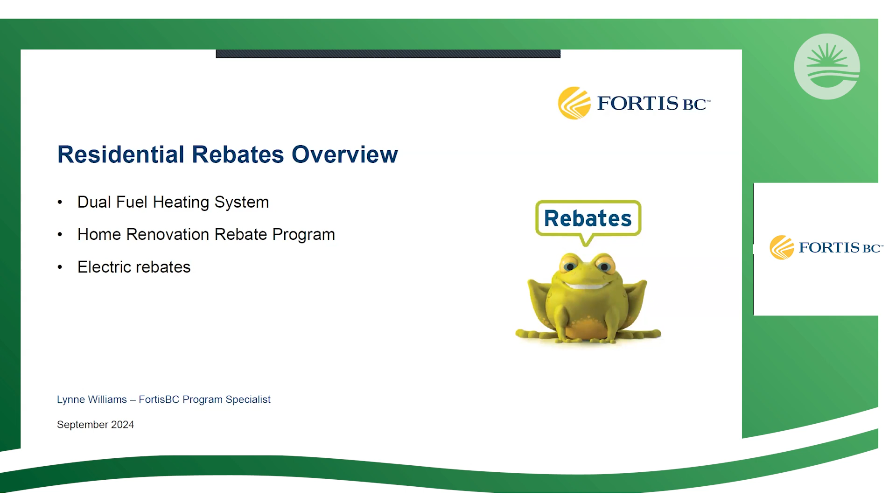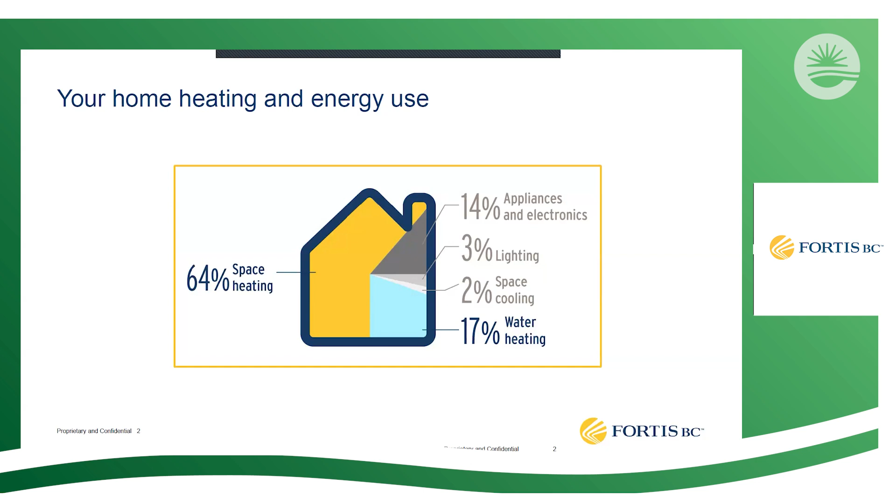So I'm going to go through our dual fuel heating system, our home renovation rebate program, and some of our electric rebates. You may not be aware, but 64% of the energy used in your home is for space heating and 17% is water heating, so this is where you may want to focus investment in energy efficiency equipment and improvements, because a lot of energy can be lost in space heating.

So the home renovation rebate program, what is it? Well, it's one of our most popular programs amongst residential customers, and it includes upgrades in existing homes, offering rebates for space heating, water heating, and building envelope, which includes insulation and windows. We also have bonus offers, so we encourage customers to complete more than one rebate, and if you do that you'll see bonuses, which ties into the whole home approach. We also work with industry to build capacity and create installation best practices for contractors and manufacturers.

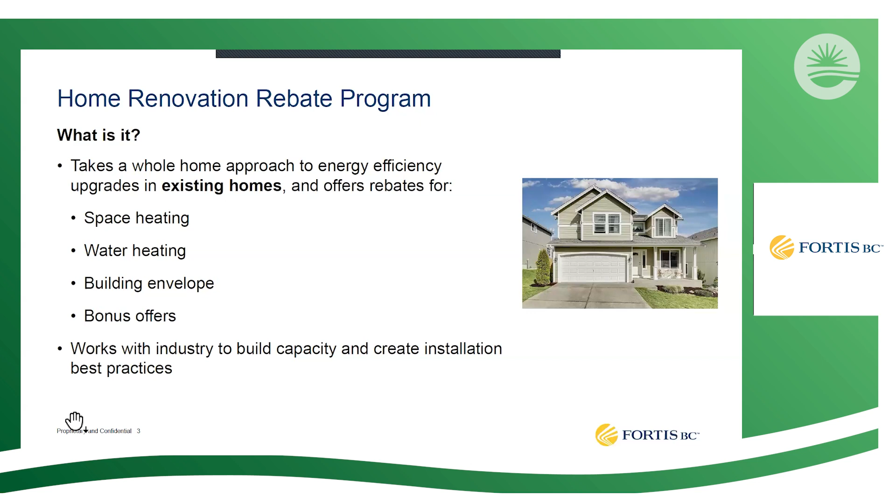So basically, general eligibility is you must have a residential account with FortisBC Natural Gas or FortisBC Electric, and electric territory is in the City of Penticton, the City of Grand Forks, Nelson Hydro, and District of Summerland. If you're in other areas of the province, then BC Hydro is who you'd look to for providing your rebates. You can also go onto the Clean BC website, which gives the rebates for BC Hydro and FortisBC, and also any federal programs—there used to be the Greener Homes program, which they've stopped, but I'm hearing it's actually coming back, for medium and low income.

So your home must be a year-round residence. That means it cannot be a cottage or vacation home, and must be at least 12 months old.

New additions are not eligible, and customers must be upgrading an existing space. Upgrades to the garage, workshop, and outbuildings are not eligible, as are existing spaces converted into a living space. Applications must be submitted within six months of the invoice date, and all installs must be completed by a licensed contractor with a GST number and a valid BC business license.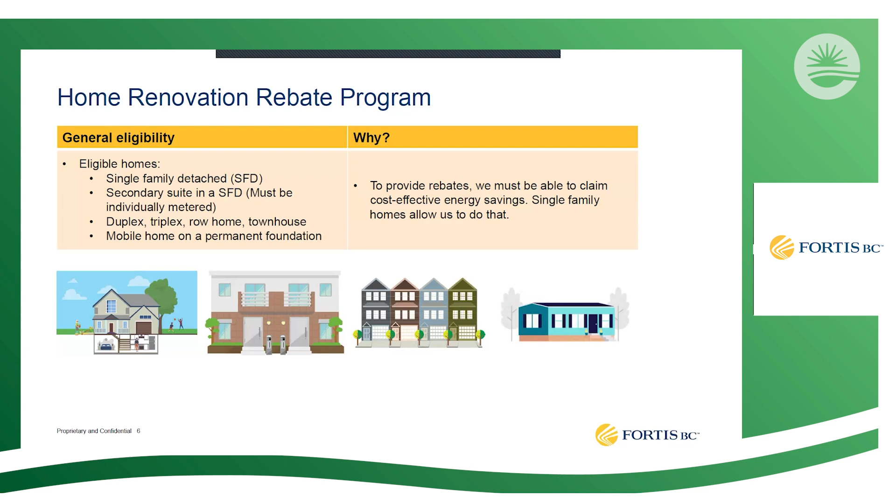The provincial CleanBC Roadmap to 2030, released in 2021, targets reducing provincial greenhouse gas emissions by 40% below 2007 levels by 2030. So the roadmap encourages the installation of dual fuel heating systems.

Our dual fuel heating system rebate helps offset the cost of installing a new electric heat pump with a new high efficiency gas furnace. When you install a qualifying dual fuel system, you'll have access to both a reliable and efficient heating system to keep your home warm and comfortable, even on the coldest days, while also benefiting from cooling on hot days, and a system that can be more than 100% efficient under certain conditions.

The dual fuel program offers a rebate of $10,000 for installation of a dual fuel system. This applies to natural gas customers looking to replace older, inefficient furnaces that are 10 plus years old.

In addition, an incentive of $300 will be available to installation contractors, to drive quality installation initiatives, including right sizing and commissioning.

Murray pointed out that nobody was doing heat pumps a while ago, and now everybody's doing heat pumps, and they can be quite expensive. So this is a pretty good rebate offer.

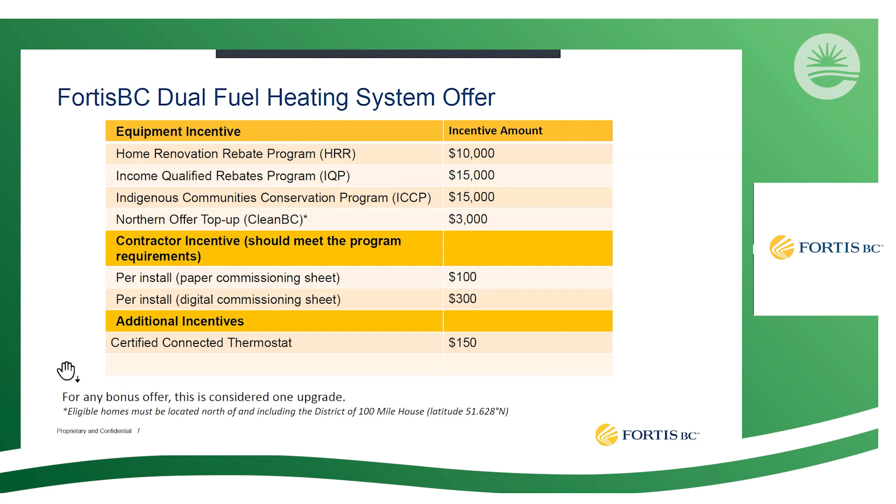So we also have the connected thermostat rebates. These must be installed at the same time as the new heating system is installed, or as part of a maintenance program for your heating system.

The new connected thermostat must be listed on the eligible page. I've got a link here that tells you what models are eligible, and maximum 1 connected thermostat rebate per home. These are just examples of what these thermostats look like.

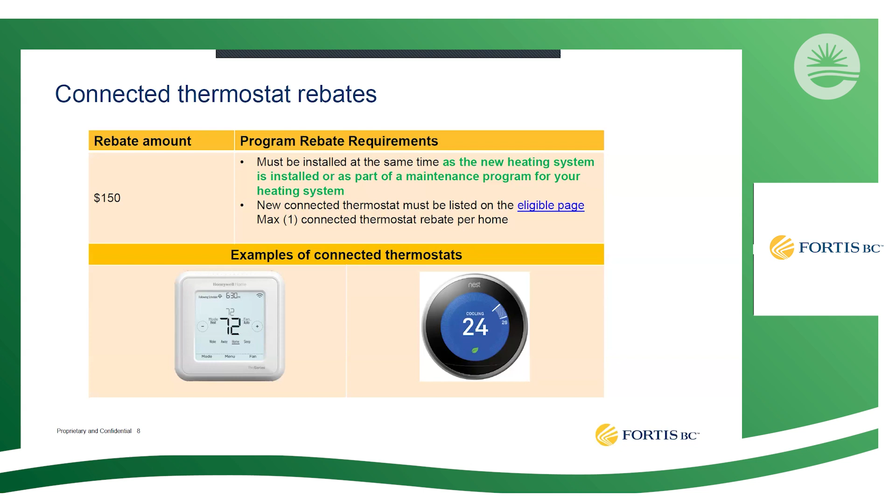So insulation rebate requirements - it must be installed by a Home Performance Contractor Network member. Self installations are not eligible.

The Home Performance Contractor Network is a database of retrofit contractors in British Columbia that meet specified trade designation and training qualifications, and they're subject to ongoing review and quality assurance checks.

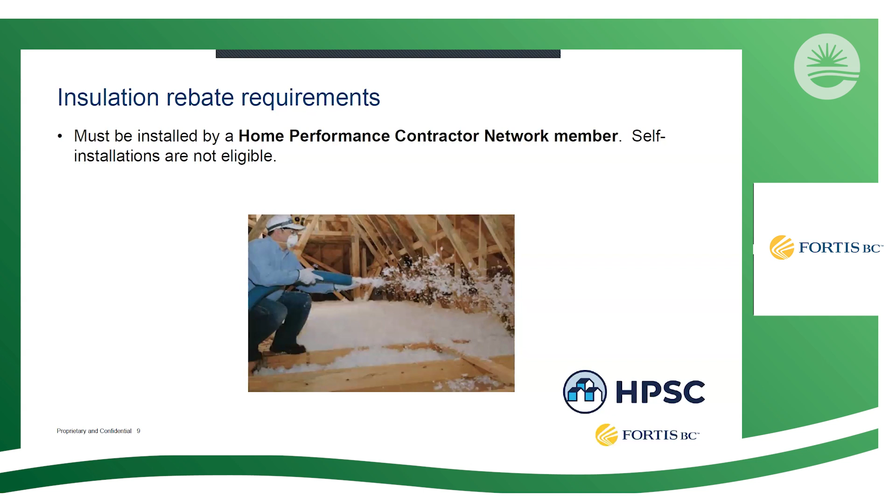These are the eligible locations for insulation upgrades: the attic, flat and cathedral ceilings, exterior wall cavities and exterior wall sheathing, and other exposed floor or floor over basement crawl space and basement crawl space walls.

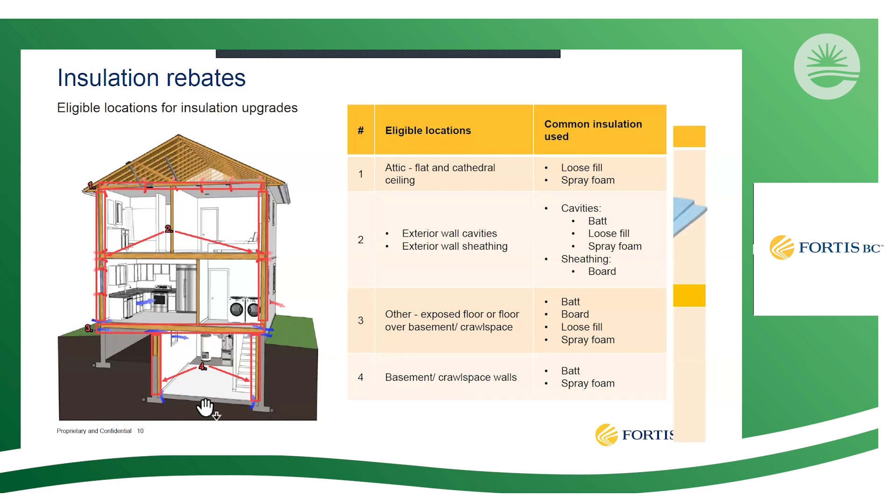Murray already went through this, but these are some of the types of insulation that are eligible for the rebates: batt insulation, loose fill, spray foam, board, and aluminum and soundproofing. These others are not eligible.

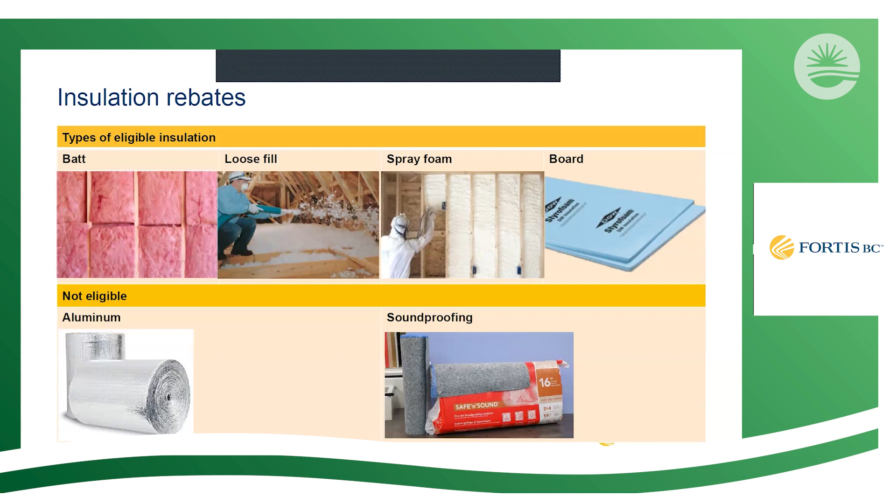Then we have window and door rebates. The specific requirements are that they must be installed by a licensed contractor - again, self-installations are not eligible. They must be replacing existing windows and doors.

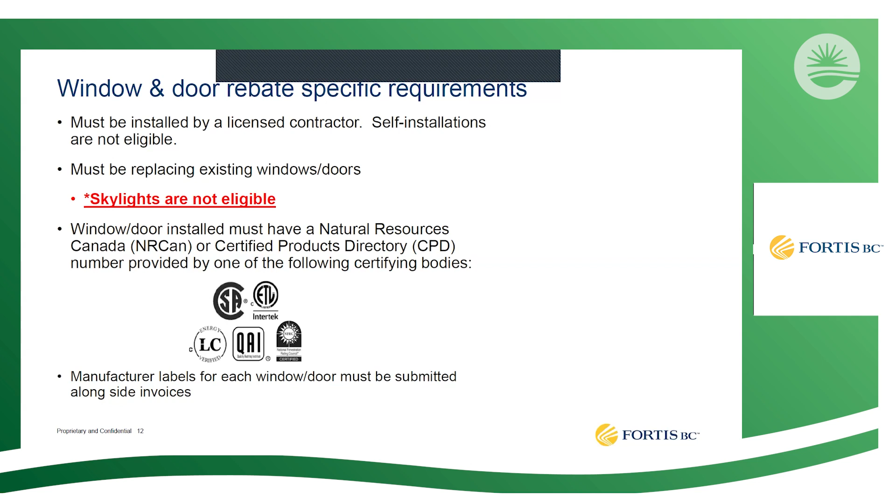Skylights are not eligible. The window or door installed must have a Natural Resources Canada NRCan or Certified Products Directory number provided by one of the following certifying bodies. The manufacturer labels for each window or door must be submitted alongside the invoices.

So for window and door rebates, the U factor can be expressed in imperial units and metric units, but our rebate requirements are expressed in metric units. The rebate amount is $100 per window or door, up to a maximum of $2,000.

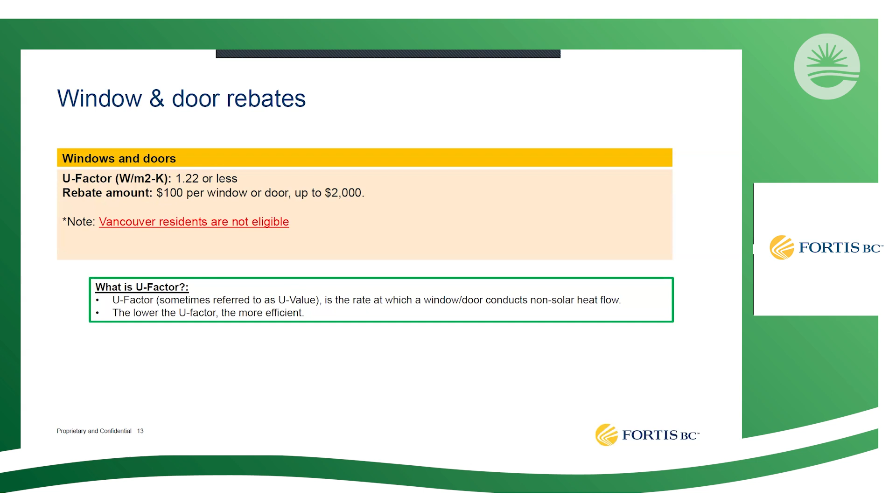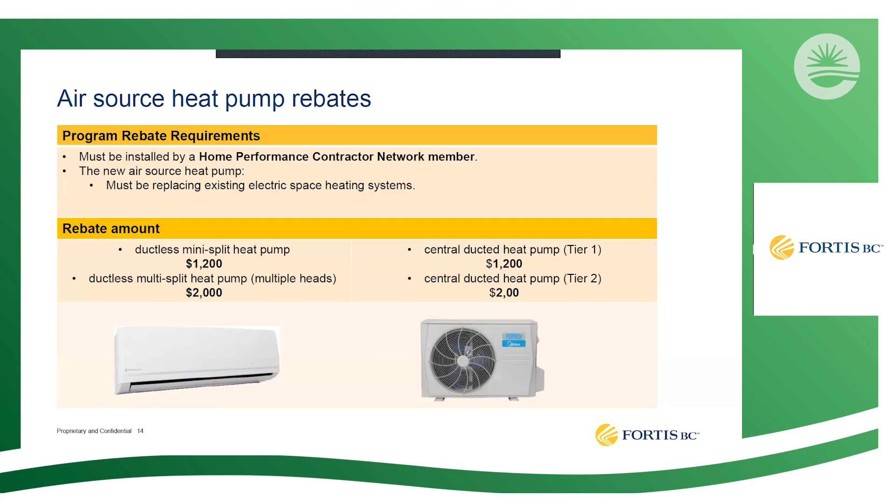Then we have our air source heat pump rebates. These electric rebates are provided by FortisBC in our shared service territory and electric only territory, which is Kelowna, parts of the Kootenays, and the southern interior. The rebate amounts are ductless mini split heat pumps, $1,200, and ductless multi-split heat pumps, $2,000. Central ducted heat pumps tier 1 are $1,200, and tier 2 are $2,000. And again, in the electric service territory where BC Hydro operates, they would have rebates for electric heat pumps as well. You can check the BC Hydro site, or the Clean BC site.

Then there's heat pump water heater rebates. These are provided in our shared service territory and electric territory, again Kelowna, parts of the Kootenays and southern interior, and they are up to $1,000. It must be a qualifying model. We have a link here that goes to our page which lists all the qualifying models.

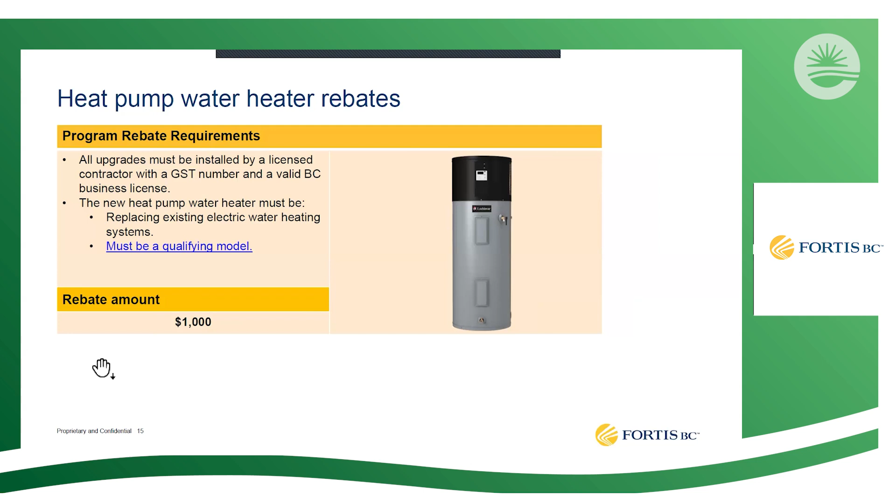Then we have our bonus rebates. If you do multiple upgrades, then we have a 2 upgrade bonus, which is an extra $300. No evaluation required, and the customer must complete 2 bonus eligible upgrades. Then we have the home energy improvement bonus, which is from $750 to $2,000. This is a little bit more involved. The customer must have a program qualified energy advisor, perform a pre and post EnerGuide evaluation, and complete 3 bonus eligible upgrades. The customer can receive either the 2 upgrade bonus or the home energy improvement bonus, but they can't have both. So just one of those.

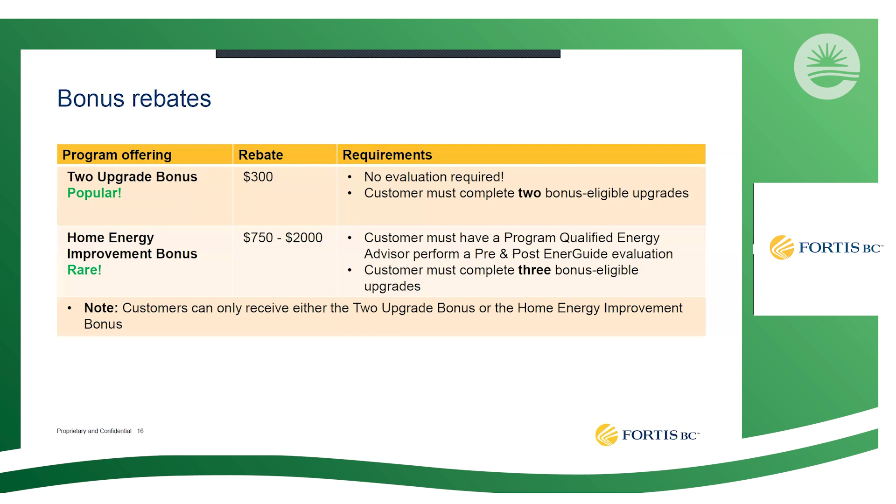Then we have additional rebates for FortisBC electric customers. There's the heat pump service, which is a $50 rebate, and the application must be submitted within 60 days of the service invoice. And then we have the Energy Star appliance rebate. For a clothes washer and dryer, that's up to $250, and refrigerators are up to $100. You must purchase a qualifying Energy Star appliance, and the application must be submitted within 60 days of the appliance purchase delivery date.

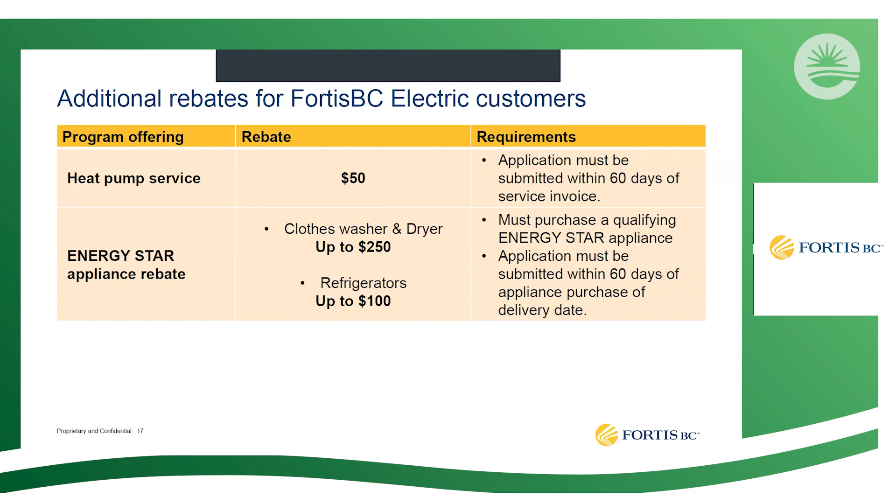You can apply online at rebates at fortisbc.com, and we've got all the information there on all the rebates and how to apply. Or you can call us Monday to Friday, 7 a.m. to 8 p.m. Pacific Standard Time, and get a customer service person that can help you with any of this information. Or you can contact me if you want any additional information, and I'll be happy to provide that for you.